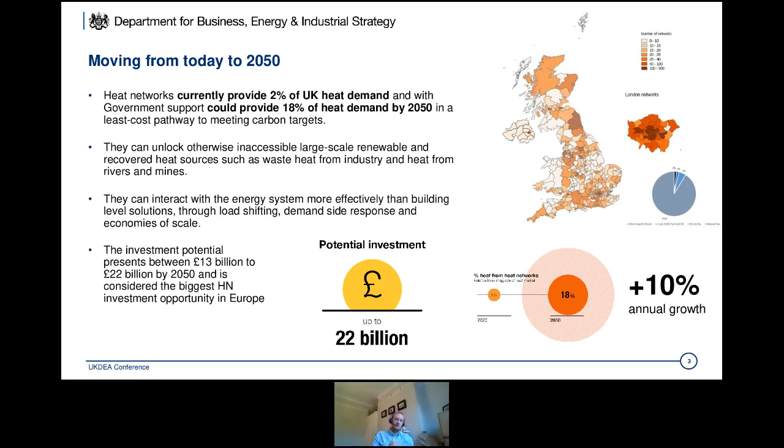But I was going to explore a little bit more about what happens next and think about what that looks like for the 2020s. So we've got something now that we're calling our Heat Networks Transformation Programme. And this is a number of projects that were at different stages of planning that we think, when brought together, give us a really compelling case for continuing that accelerated growth of heat networks in the UK to 2025. So just to unpackage that a little bit.

We've got actually the final year of the Heat Network Investment Project, where we want to finish supporting all of the fantastic projects that we see in the pipeline. We've then got our Green Heat Network Fund, which was announced at the March budget, which is our 270 million capital support scheme to aid the transition from fossil fuels to low and zero carbon heat networks and start to make an even more meaningful contribution to 2050.

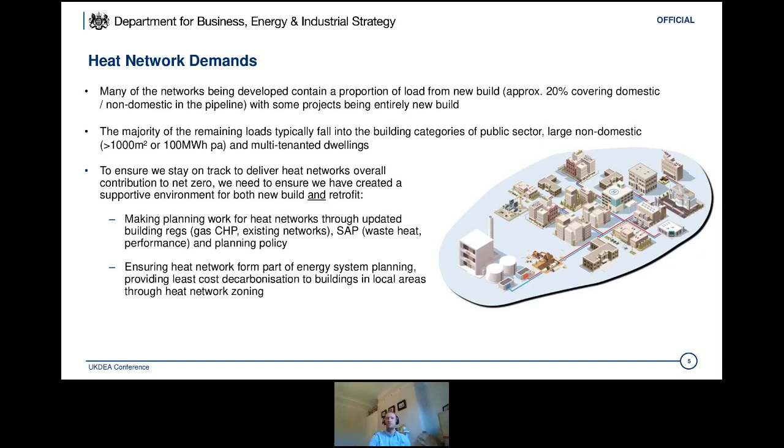Then on the retrofit, I mentioned the zoning already, and that's really more of an energy system planning role, whether that's national, regional, or into the local, and making sure that it all fits together and makes sense. I also just wanted to flag that we do recognise that sometimes it can be challenging having conversations with developers, especially if looking to trade off a lot of different demands, whether that's affordable housing or green space or amenities, wider climate change and energy efficiency requirements. And whilst we love heat networks, we don't think that heat networks are appropriate everywhere. And actually, we wanted to try and build a common language between governments, between local authorities, developers, and others, to try and work out at an early stage whether having the argument about the heat network was the right thing to do for that particular development.

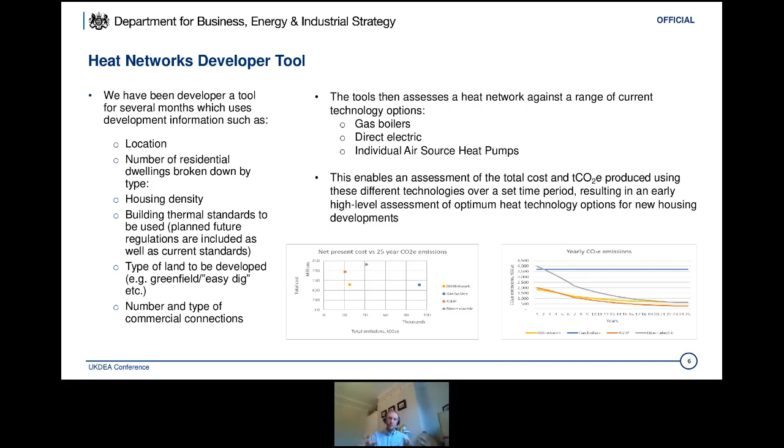So we've been progressing the development of an early screening tool for a little while now. Again, working with developers and other people in the market. I won't say too much about this. I suspect that I should probably send something around afterwards just to outline what it is and what it does. But essentially, it looks to compare the upfront costs of a building level solution to a network solution and consider how those costs impact the different parties. So the developer and the customer, and make sure that things are clearly articulated and communicated to all those parties, so people know what they're signing up to.

And then finally, given the fact that I'd stepped through what I see as our package of support in the 2020s, I'd also just say, well, actually, what might it look like in 2030? So, for me, there's been a shift to low carbon heat sources, and there's a clear trajectory for all heat networks to net zero. We have seen year-on-year growth. We've talked about 10% growth rate, and we'll see significant investment in the sector. And those networks are going to be larger, more strategic. I think all areas across England and Wales and Scotland where heat networks are most cost effective will have been established and clearly communicated, and they'll have started to be built out.

That there are a variety of investors coming in because of this changing risk profile and the size of the prize. That our supply chain has matured and our ability to commission projects has matured. So we've got lots of different new people in the market. That actually some of those wider benefits of the energy system that I talked about are recognised and hopefully monetised, so that if your heat network's offering a system benefit, you're getting paid for it. That all domestic customers are adequately protected, and those that aren't included in protections actually think they're getting a good deal with the quality of heat that they're receiving. And that we've got a set of common standards across all networks, so that if we do have individual networks still coming forward, they can connect and grow over time.

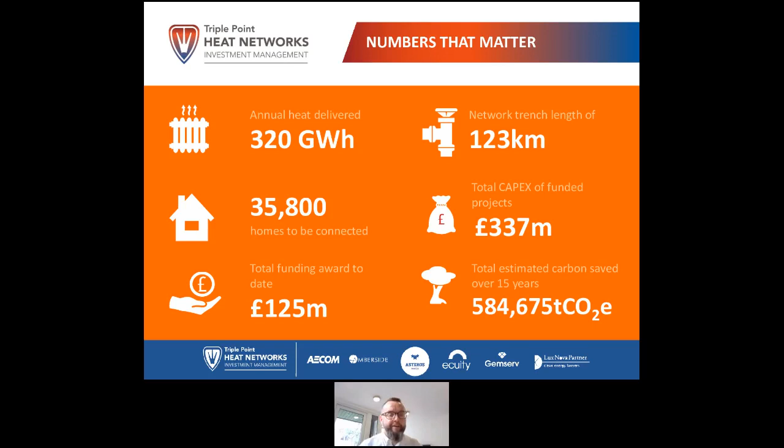when these projects get built out, our investee projects now, to whom we've made the £125 million worth of awards, that will have unlocked an aggregate capex of £337 million that will contribute to delivering 320 gigawatt hours of heat per annum to a little over 35,000 homes, as well as a number of businesses and public sector buildings. It will do so along an aggregate trench length now of 123 kilometres, and it will deliver, frankly, a pretty whopping close to 600,000 tonnes of CO2 over the first 15 years of operation of those projects.

Now, if they're the numbers that matter, I think given the state we find ourselves in, a COVID-ravaged country, these are probably the numbers that really matter. The Local Government Association and the Institute for Public Policy Research estimate that as many as 700,000 jobs could be created in the transition to a green economy. Better than that, they say that as many as 80,000 could be created in the district heating market alone. And we're seeing evidence of that now.

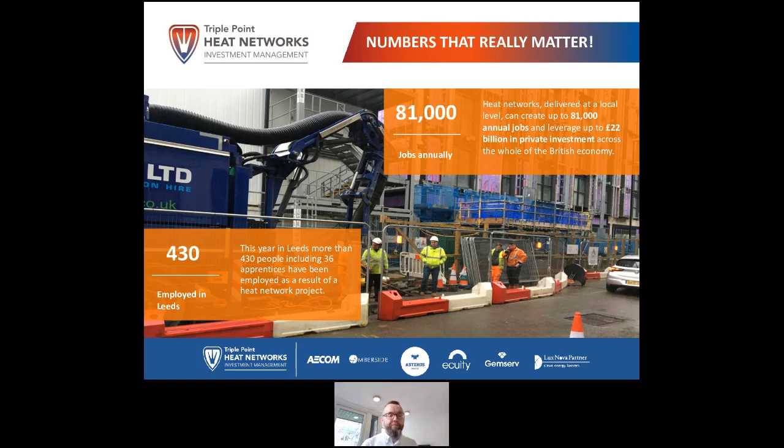Vital announced just last week that they're building a training and skills academy up in Blackburn. And we were thrilled when Leeds City Council, one of our first round success stories, told us that our funding had been an enabler of 430 new jobs already in the city, including 36 apprenticeships. All really brilliant stuff. And if driving local and national economic growth are a priority for the scheme, it's also true that it's vitally important that we inject capital and liquidity into the supply chain, the domestic supply chain in particular, firms like very many of you here today.

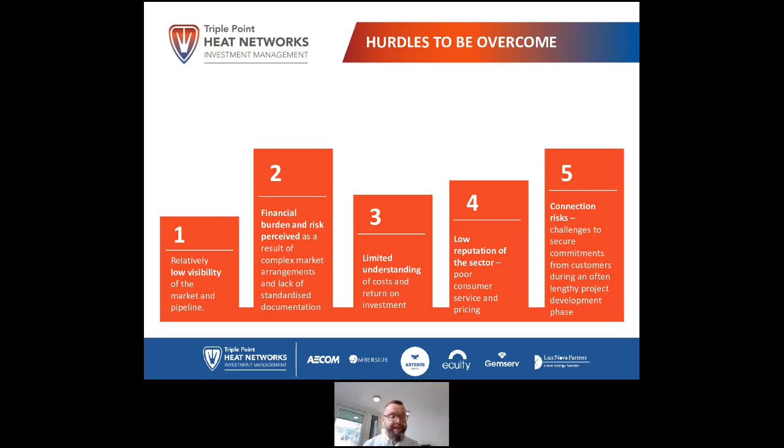Triple Point have already got a pipeline of something like 200 projects across the public and private sectors, and we've got the likely appointment of an experienced regulator that John described on a really near time horizon now. The sector is also being professionalised as well. Our colleagues in the delivery partner group, the legal firm Lux Nova, have produced some templated sales, operations and maintenance contracts available to anyone developing a district heating scheme. We've already seen evidence of their use in the market, which is awesome. Their use means saving projects valuable time and, of course, lots of money on legal fees as well.

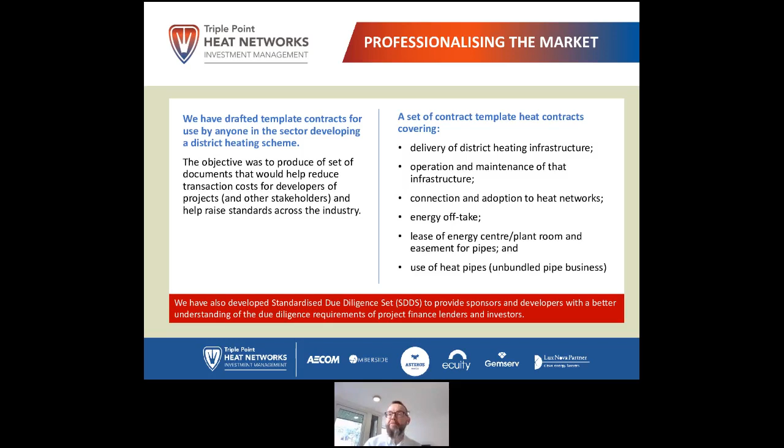More than that, though, their widespread use is a driver of the kind of standardization that is so attractive to investors. Within the delivery partner group, we've also developed a standardized due diligence set. That's a set that provides sponsors and developers with a better understanding of the due diligence requirements of investors and lenders alike. All positive stuff, I hope you agree, that's brought us to the point where we feel able, finally, to launch a funding framework with high levels of confidence in its likely success.

We have now created and launched a new heat network funding framework. It's an OJEU procured dynamic purchasing system that will attract, we hope, funders and investors with requisite levels of experience and appetite to bring heat network projects to fruition. It will have a broad range of funding available. There will be a senior debt lot, an equity lot, there will be an asset finance lot, and funders will be expected to demonstrate an ability to deliver services alongside that funding as well. And it's going to be available to all public sector sponsors and owners of heat networks.

We think this is key to fulfilling that brief of the self-sustaining market. It provides a really efficient and proven way for the public sector to access private capital in a way that provides certainty of procurement. Certainty of procurement is super important to local authorities, also to investors in particular. It allows public sector bodies to engage funders to help structure and financially close projects as well. And as I said, the exciting news is that this is out now, today for the first time in OJEU. We've called it BHIVE. We love an acronym. It's the BEIS Heat Investment Vehicle. Out in OJEU today, it appeared on ProContract just a couple of days ago.

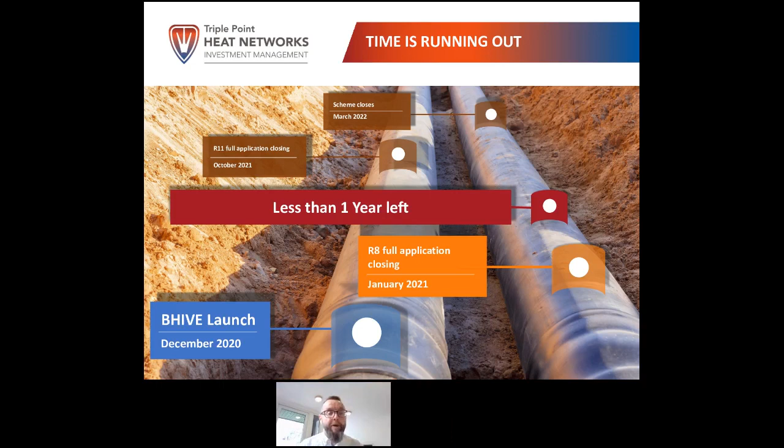application for round 8. From that point onwards, there's less than a year to go, at least until the final closing round for applications. Round 11, the last round, closes full applications in October 21, that ahead of a full scheme closure in March 2022, with no prospect of an extension, I'm afraid.

Simon's joined me, so I reckon I've got a lot to say. I did promise you just 10 minutes. Sorry, Simon. Last slide then.

If there are short-term challenges, there are definitively long-term wins. We are going to get this money spent, every penny of it, and draw in more from BHIVE alongside it. There's going to be an awful lot of learnings as we grow our experience bank. We are going to deliver on those carbon savings. And really excitingly, we have seen and continue to see a real ignition of political interest in heat networks.

Now, our Minister of State, Kwasi Kwarteng, has been tweeting for England about all the good works. BEIS, of course, Triple Point, of course, but all of you and Simon and the association, about all the work that we're doing in developing our heat networks at pace. It is possibly, probably true that in time, a lot of our decarbonised heat will be derived from other technologies. But the Minister seems to know now that which we already know, that heat networks are the bit of the jigsaw that we can be getting on with today and must be getting on with today.

And sorry, Simon, I'm all done. No worries, Ken. Thank you very much indeed. I'll give you a solo clap there, because apologies, we're all working virtually. But no, you did a brilliant job of talking us through heat networks and the support that Triple Point were offering to those. So I'll let you leave the stage and invite Catherine to come and join me, and Tom, if you don't mind putting Catherine's media up on the stage, then I will step off and let Catherine carry on with the presentation. So thanks very much indeed. Over to Catherine. Good morning, everyone.

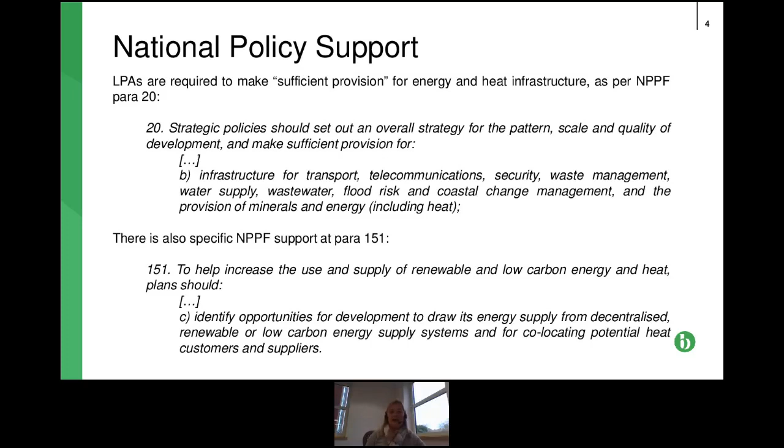So at a local level, many local authorities will have detailed policies which really attempt to introduce into their areas requirements for the delivery of district heat networks. Not all local authorities have done so. Sometimes there are numerous hurdles as to why this hasn't been done, but there are many who are proactive, and I'll just run through a few who really approach this challenge in various different ways. I know several of the later speakers are going to touch on a lot of these schemes in more detail, so I won't cover it in huge detail, but just to give you a bit of a flavour.

So in Stratford-on-Avon's core strategy, for instance, which is one of their development documents, they've designated specific district heating priority areas where new development is required to provide infrastructure for district heating. So if development comes forward in one of those priority areas, they are required to consider infrastructure for district heating. And then in Bristol, where I'm located, we've got heat priority areas within which developers are required to incorporate infrastructure for heat networks where it's technically and financially viable.

And I know we're going to have a bit more of a presentation on that from Paul later on. Another approach as well is some authorities have identified that schemes aren't really coming forward, so they've decided to take the initiative, and in Leeds, where there was insufficient private sector funding for these schemes, they really earmarked public buildings and social housing to be the first anchor load of connections in the development of a city's heat network, really to kickstart the heat network in that city.

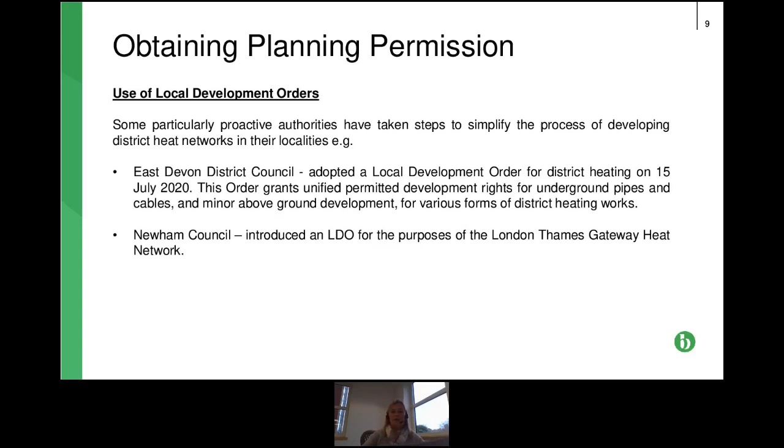Network. I think there is a section on local development orders later, so I won't touch on that in too much detail. I just wanted to mention this in passing.

The last topic I just wanted to mention is the building regulations position, which potentially could be a bit of an issue in the future. Building regulations is changing, and the standard assessment procedure that sets out the methodology for determining property ratings is changing. The process that's being introduced was supposed to come in late 2020. I think that's now going to be next year. But the whole aim of it really is to align with the upcoming changes to building regulations Part L, which sets out quite detailed energy efficiency requirements.

And the issue that we're starting to hear from our clients and within the industry is that the overarching objective of the current changes is to move towards the decarbonisation of the electricity grid. And the standard cogeneration approach to district heating would receive a carbon penalty under this new assessment regime. Unfortunately, the new regime doesn't treat site-generated electricity as favourably as it has been, which potentially could discourage the use of CHP and potentially undermine the operation of heat networks.

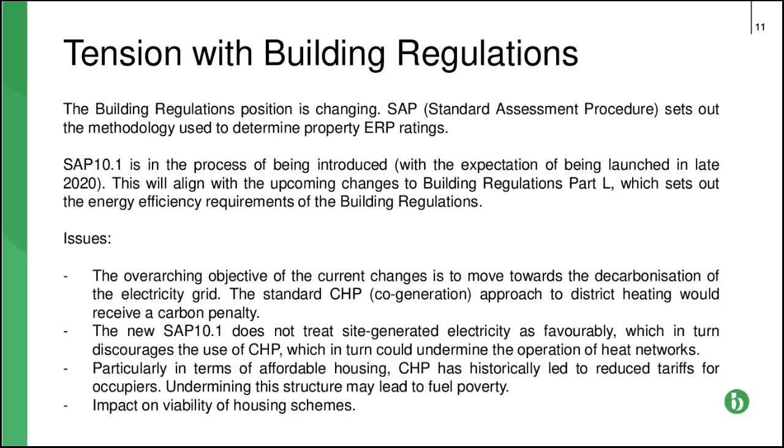We've certainly heard from some of our affordable housing clients that CHP has historically led to some reduced tariffs for occupiers, and they are concerned about the reduction in these benefits, which could lead to fuel poverty. And they're also concerned about the viability of housing schemes. There's concern that some developers could be penalised by being required to connect to these housing schemes. So viability is a bit of an issue. So I think that's something to be aware of.

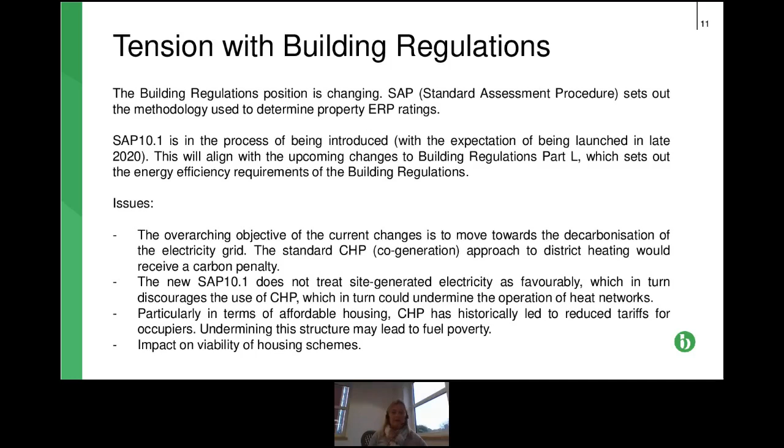So conclusions really: there is a national and local planning policy framework to assist in the delivery of heat networks and the heat infrastructure that's needed. As I've mentioned, many think there isn't really quite enough teeth in that framework to really require developers to deliver. Obviously, it's different if you're a local authority who's looking to deliver their own scheme. The localised adoption of policies that really implement what's required at national level is a little bit patchy. Many local authorities are very proactive, but other local authorities have significant hurdles to overcome, and so their policies are not always quite so helpful.

But I think there is a real problem between translating what is at national level into local level and how to really get it implemented. There are planning permission hurdles, and I think it would be really helpful if there were some permitted development rights for this type of infrastructure to make the process more streamlined. And lastly, as I've just mentioned, I think there is potentially a bit of an issue with the new building regulations that are coming forward. So I hope that was a helpful overview, really, of the planning policy framework and how that supports heat networks.

Brilliant. Thanks very much indeed, Catherine. That was really interesting. I was personally frantically scribbling down, although we'll all receive copies of your presentation, and I thought you raised some really interesting case studies as well that I hadn't personally come across.

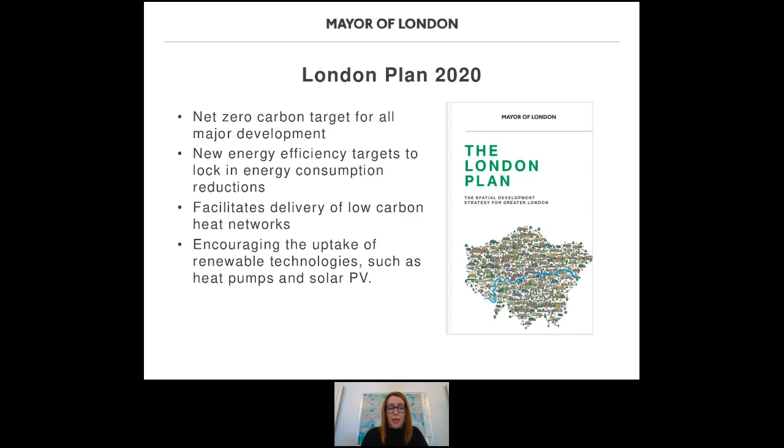They must be clean, supply energy efficiently. This is where district heating networks come in. And they must also be green, so use renewable energy before offsetting any carbon shortfall. And they do that by making a payment into the relevant borough's carbon offset fund.

Be lean is really the most important aspect of this, to reduce demand as far as possible in the first place, before considering the most appropriate heat source for the site. And the new energy efficiency targets that we've introduced are really intended to support that. And we're already starting to see planning applicants respond to those targets and achieve higher energy efficiency savings.

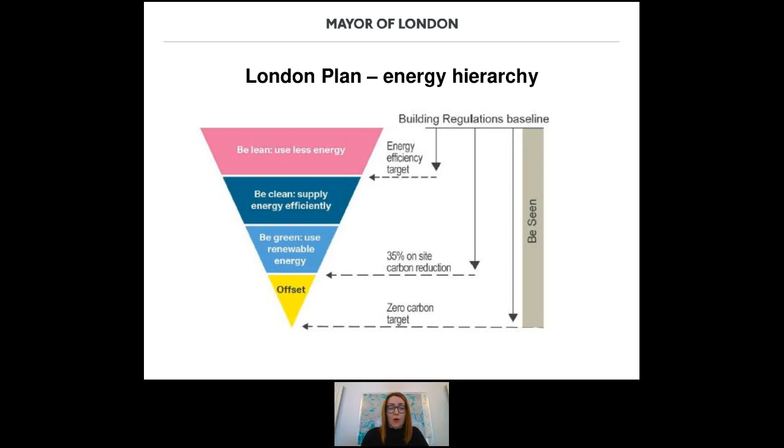Be clean is where the carbon savings from connecting to heat networks are captured, and to establish the carbon savings that are achieved at this stage and what heat source is selected, planning applicants should follow the heating hierarchy set out in the London Plan.

So major developments in heat network priority areas. These are areas in London where heat density is sufficient for heat networks to provide a competitive solution for supplying heat to buildings and consumers. So major developments should select a heat source in line with this hierarchy if they're in one of these areas.

So first of all, they're required to identify whether their site is in a heat network priority area and whether there is an existing or planned heat network in the vicinity that the development could connect to. So heat network connections for new developments really are prioritised, and we want to see they're fully investigated before moving further down the hierarchy.

And if a network is planned in the area but not already in existence, then the development must demonstrate it is designed to connect to that network when it comes forward later on. My colleague Simon, who's presenting later on, will be covering that in some more detail.

So if not, they then move down the hierarchy to point B, so using zero emission or local secondary heat sources in conjunction with a heat pump. And that really is to encourage use of secondary heat from environmental sources, whether that's air, water, ground, or waste sources, so heat from the tube, sewer systems, data centres.

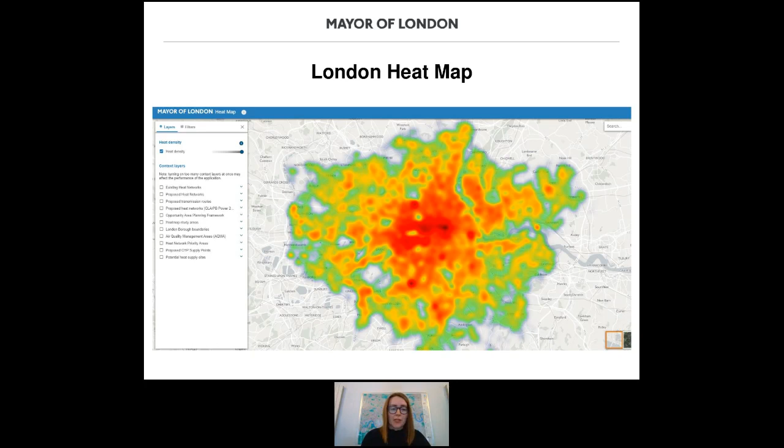And then finally, I wanted to outline the work we've been doing to support heat network decarbonisation plans. So since January 2019, we've been encouraging the use of updated SAP 10 emission factors in planning applications. This was in response to national building regulations using outdated carbon emission factors, which weren't reflective of the decarbonisation of the grid and therefore leading to higher carbon new development. So that wasn't a position we felt that we could justify. So we took the decision to take this approach until government updated building regulations with updated emission factors.

However, we are continuing to allow the older SAP 2012 emission factors at sites that have potential to connect to a district heating network, which are typically gas engine CHP, because of the benefits district heating networks can have in terms of establishing a flexible energy system for managing demand, making more effective and efficient use of energy at scale, as well as their ability to make use of secondary energy or waste heat sources, and for decarbonising supply to multiple consumers, in particular those in existing less efficient buildings, as lower carbon heat sources come onto a network over time.

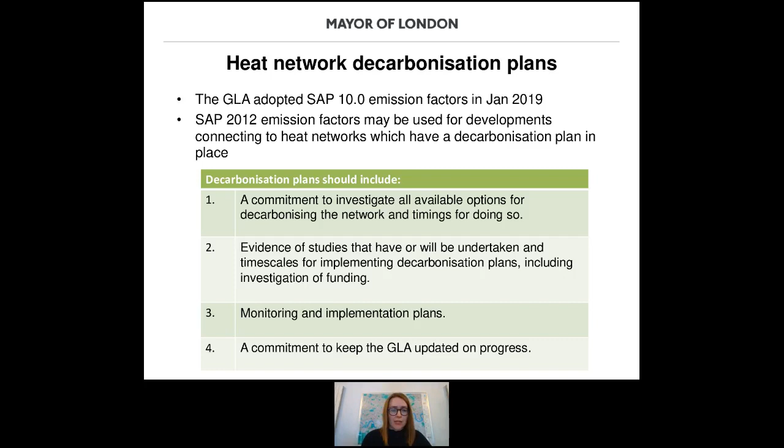Thanks very much, Anne-Marie. That was a really good run through of what's happening in London and sort of set the scene for seeing what's going on in other parts of the country. So thanks very much indeed. So Paul Barker, if you don't mind coming onto the stage, and Tom, excellent, already done. And I will rapidly hand over to Paul to talk us through what Bristol's approach is to ensuring new developments connect to heat network. Great, thanks, Simon.

So good morning, everybody. My name is Paul Barker. I'm the Energy Infrastructure Manager for Bristol City Council. So I am not a planner. I'm on the development side of the council, and we're actually developing our own heat networks. And so that's where I'm coming from in terms of the discussion. So basically going through a little bit of where we've got to ensuring new developments connect to our heat network.

Okay, so just a very quick one about what we're doing. So you always have to have a slide with a picture of a district heating pipe being installed within it, and that's just showing that we are actually installing heat network district heating pipe at the moment within the city. We've got plans for that to be a decarbonised heat network.

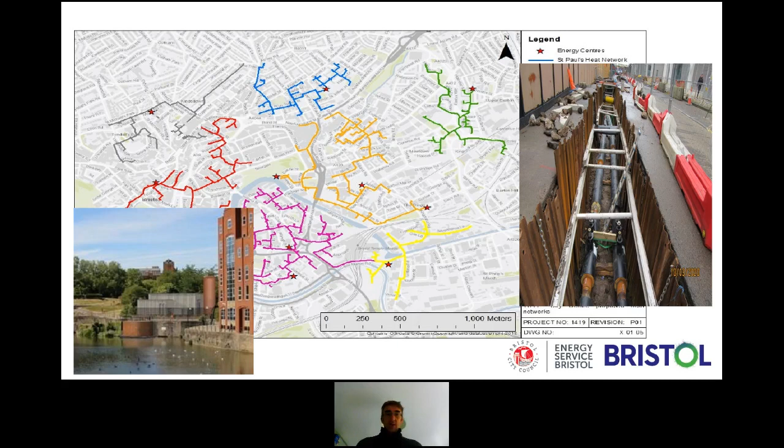So the picture in the bottom left-hand corner is we recently received planning permission for a water source heat pump energy centre. So we're installing a 3 megawatt water source heat pump that will utilise Bristol's floating harbour to provide zero carbon heat. And as you see from the slide, there's a number of heat networks that we're developing ultimately to connect into a citywide heat network.

So my brief was around discussing how we ensure new developments connect to the heat network, and essentially, as was previously picked up by Catherine, we have a planning policy. It dates back now. I can't believe it. I realise it's 2011, so it's nearly 10 years old. So it's actually getting a little bit long in the tooth. And certainly if we had the time again, we'd make some changes to it.

But essentially, there's 3 areas that it requires. So there's ensuring energy efficiency with new developments. The other element is that there's a 20% reduction in CO2 from on-site renewable energy. And the other element, the key element, is the heat hierarchy. So very similar to the GLA.

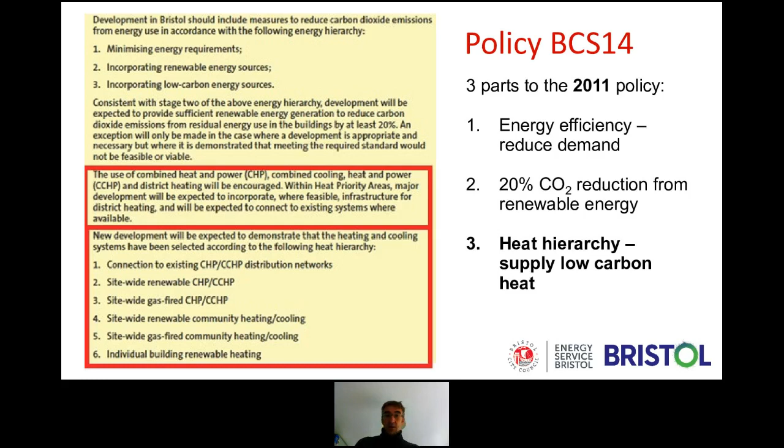We do get developers that do not want to connect to the heat network. They do find it a hassle, so they will try their darndest to get out of it. So certainly things that we would look to do if we had an opportunity to refresh our policies going forward.

I think as we move forward, we may look at reducing this and looking at heat network zones and possibly individual zero carbon heat solution zoning on buildings. So that's something we're looking at. But having it quite large enables the council to look at those new developments and decide, okay, this is not an area where we are developing a heat network. It could well be in the future. So we would expect at least a district heating ready solution.

But if it's an area that we think is low density housing, and it's unlikely that we will develop a heat network, then we'll allow them to move down the heat hierarchy and ideally provide a zero carbon heat solution on that development. And I think that's the great thing, albeit it does mean that there is a resource requirement for the council to have somebody or a team available to do that assessment.

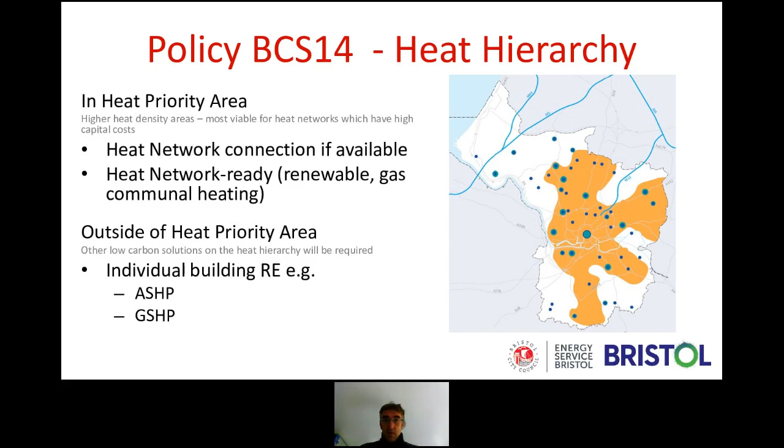So I'd said that we have had very good success with actually ensuring new developments connect to the heat network. I think there's some key reasons for that. So for each planning application that's submitted, they would have to provide a sustainable energy strategy. That is then reviewed not by the planners, but actually by a small team who is a part of our sustainable city team. So they review those strategies. So they have a certain level of expertise to review those and provide advice to the planners.

So it's not the planners having to be an energy expert. They've got somebody to lean on. And equally, because the heat network development team is within the city council as well, my team, we're able to both support the sustainable city team with their advice and also planners. So yesterday, for example, I was on a call with a developer who did not want to connect, to sort of push the rationale and to combat some of the regular questions we get about why we want them to connect to the heat network.

So I think the other big bit of success is the fact that we use Section 106 agreements to ensure heat network connections more so than planning conditions, and that's what I'm going to come on to now. So initially it was planning conditions that the planners would generally put on a development in terms of requirement to connect to the heat network. But actually, and interestingly, it was a developer who initially said, actually, I'd like it. Can we have it as part of a Section 106, please?

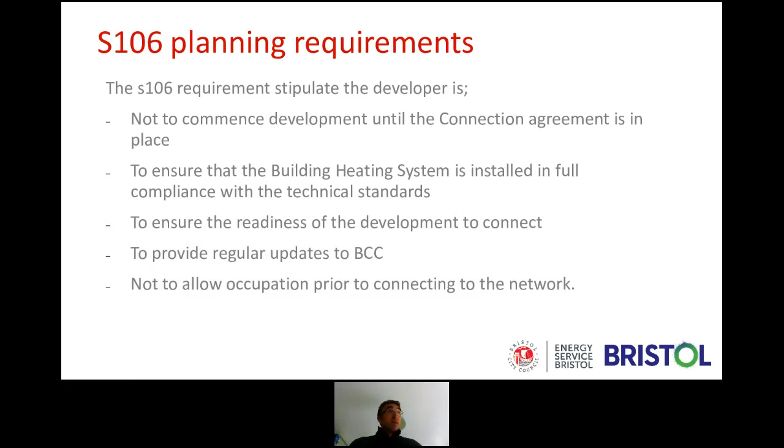So it allows us, within the Section 106, that at key points they would come to us and say, right, is your heat network going to meet our delivery timescales? And if we say yes, then they will start progressing a heat network connection. If we say no, it's not looking like our heat network will be in that area by your required date, then we would allow them to go back to a district heating ready solution.

And that's where we worked very closely with the developer and their M&E consultants to design a really good CIBSE code of practice building. And actually we moved that from a 2 megawatt connection down to about a 1.2 megawatt connection, just through the fact that they were over designing parts. So there are actually some savings to this for the developer.

Yes, we have seen some real success, and we continue to use the Section 106. And I think a key thing is we've worked very hard with our planning officers to get their buy-in, and we're seeing the fruits of that labour now, as they are very happy and confident to push back when developers say they don't want to connect to the heat network. So I think that was my last slide.

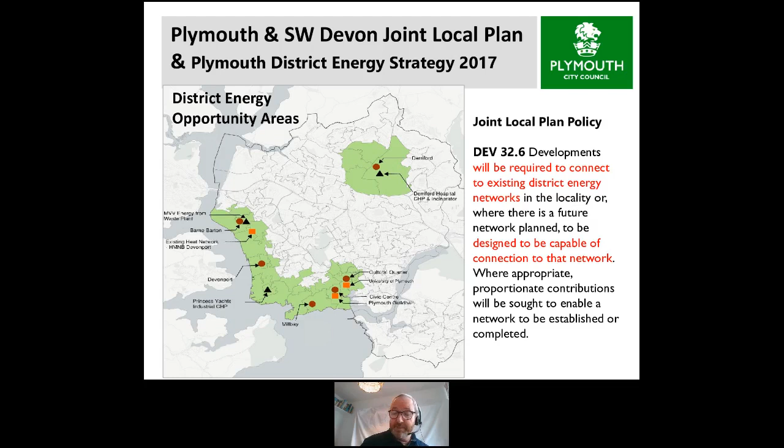And so evidence base is a key part of the planning, and we also have to justify. We had to do a viability appraisal to demonstrate that it wasn't too onerous on developers. So there's lots of challenges in producing these, but we're quite happy with the results, and it is working, and we are getting some success and traction now. But obviously, that's still quite high level.

So the supplementary planning document that underpins that provides a lot more detail. It doesn't set policy, but it gives a lot of guidance, particularly in terms of district energy. So as well as those district energy opportunity areas, it also gives some criteria-based characteristics where we'll expect developers to set out their approach to district energy.

As with planning, there's always two get-outs for developers which they can use, which is they can argue that it's not technically feasible. Obviously, we can challenge that, and also it's not financially viable to connect. So there are always in planning, wherever you are, those two get-outs.

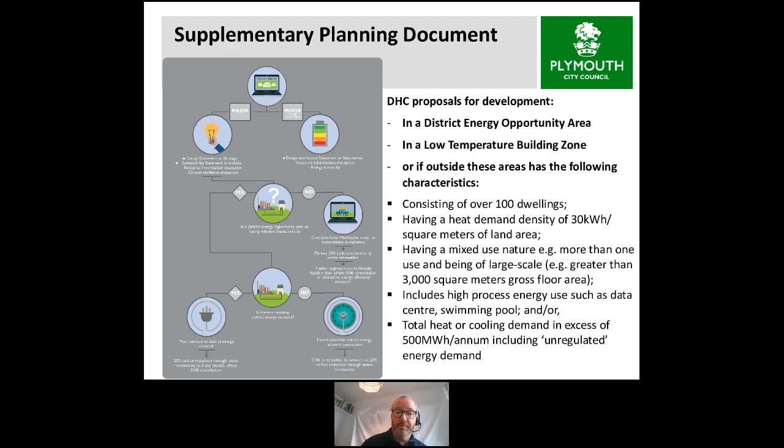But one of the things we've found in the past, in terms of comments, is that planning can play a key role in helping to create the market certainty locally by having strong planning policies in place. I've heard that time and time again, and I think that's really key here, particularly with different timescales of different developments coming forward. It can create that local policy certainty for the market to develop. But the supplementary planning document also covers a lot of detail about CIBSE standards and what our expectations are in terms of connection.

Planning is not the only show in town, and as has been mentioned before, future building regs are also going to create challenges to existing networks and create opportunities for new networks in terms of decarbonisation. So existing heat networks reliant on gas CHP will struggle to connect new developments to achieve policy compliance with building regs. Building regs, we've always wrestled with in terms of the relationship with planning. Building regs deals with individual buildings. It doesn't deal with collective building solutions, although it does give credits for connections to district energy. But it's something we do have to grapple with.

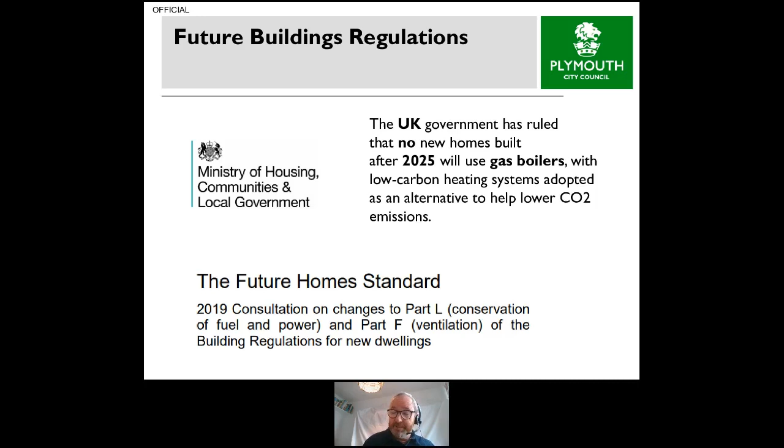And with SAP 10 coming in, again, I echo Paul Barker's comment. We've seen challenges with electric heating. We have fortunately put in our supplementary planning documents that we will not accept direct resistive heating. And that's for similar reasons. It's going to scupper our decarbonisation plans through electrification of heat and transportation. And we're working closely with Western Power to explore the impacts of heat pumps at scale.

So moving to lower carbon solutions means that we do have to look at different approaches to heat networks, but also local opportunities, which will vary from city to city, as well as waste heat. Where are the renewable sources of heat going to come from? We're quite fortunate in Plymouth. We're surrounded by the sea. Again, I'm amazed that marine heat pumps, we've been looking at various European projects previously, talking to lots of coastal towns and cities, and marine heat pumps aren't really on the radar sufficiently, I don't think. I think they've got huge potential.

But we're surrounded by the sea. There's also looking at the geology, sources of waste heat, and also air source. Particularly in the southwest, we have a very mild climate. Air source can work even better perhaps than some other parts of the country.

And in terms of whether you're looking at fourth or fifth generation district energy, we've done a lot of work through our HeatNet project, European projects, as well as the excellent Celsius project, where really the distinction between fourth and fifth is reducing the operating temperatures of systems to use more waste or renewable energy. Fifth generation is really providing heating and cooling, a different system architecture. And I think from our evaluations of fifth generation, you need a sufficient cooling load, which we do have in our city centre, of 40% or more to make fifth generation work in a technical sense.

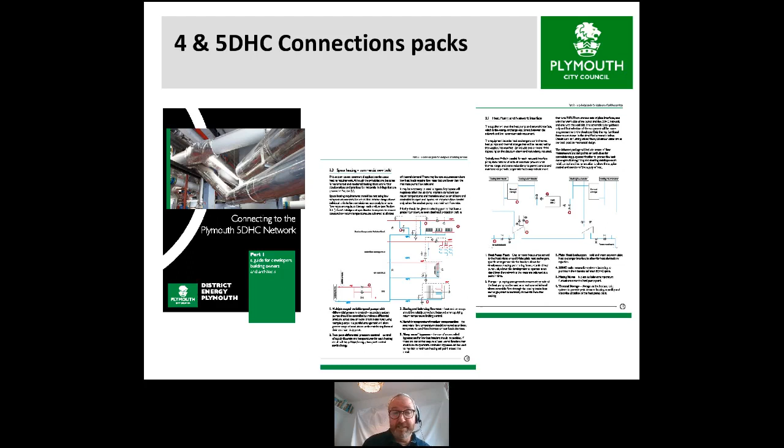Fifth generation, as I say, we're looking at it in the city centre. It does have benefits. The fact that the weather patterns are changing, we're getting more heat waves, cooling demand will be increasing, possibly heating demand reducing. So it does give some flexibility, but also lots of other benefits in terms of air quality, etc.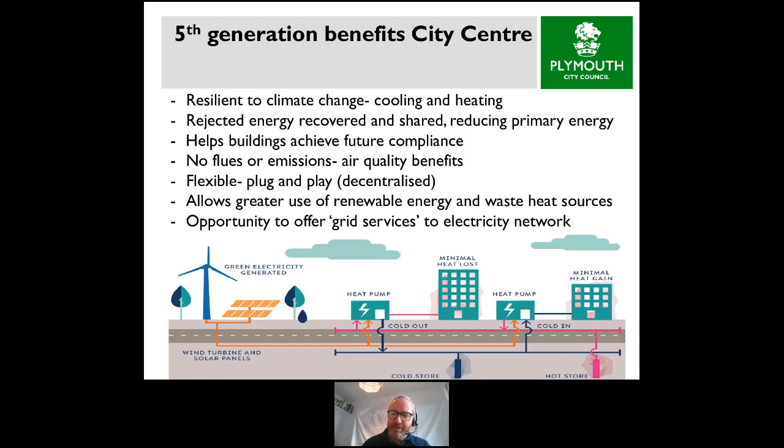One of the challenges for us in negotiating solutions with fifth generation is the fact that it's decentralized solutions on a building by building basis. The equipment, the substations are on a building level as opposed to larger centralized equipment. And you need to think about the electricity supply in that context. So there are some challenges there, as well as opportunities.

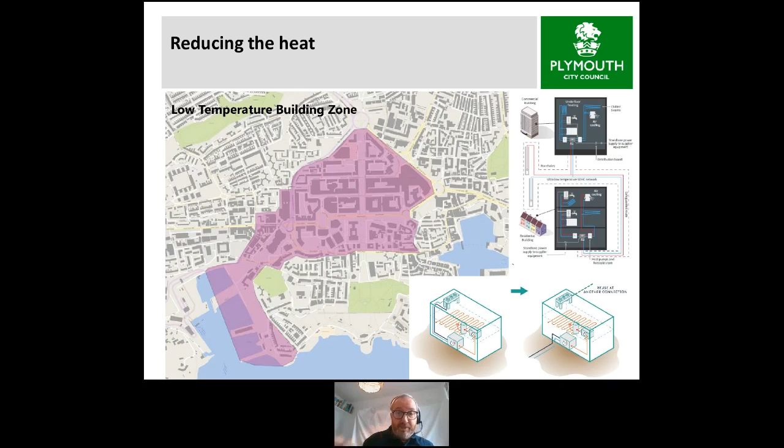And to try to facilitate that approach, we talked about zoning, some questions about zoning as well. In our supplementary planning document, we do show a low temperature building zone to try to drive down those operating temperatures to 60 degrees or below for low temperature in buildings, and ensure we've got the return temperature that's 20 or 30 degrees lower, to facilitate those sorts of solutions. And there's some extracts from our technical packs on the right hand side of the slide.

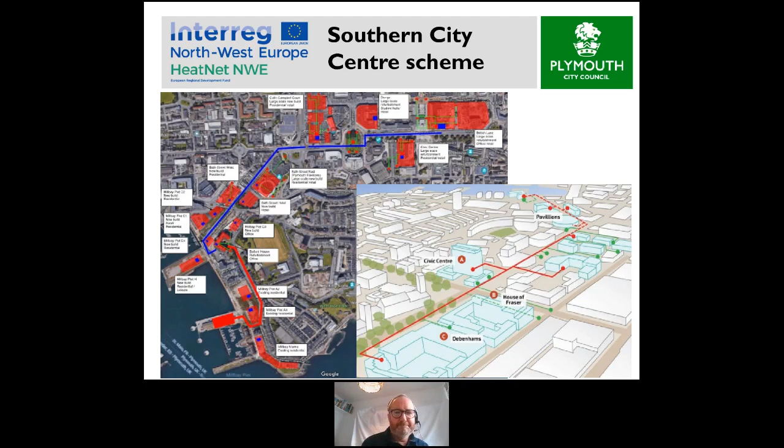And this is the last slide, you'll be pleased to hear, which sets out one of our networks that we're looking at, and in development. We put some infrastructure in already, in Millbay and Southern City Centre. As you can see, we're keen to get to the harbour side and deploy seawater, as well as exploring ground source solutions with an underground aquifer under this part of Plymouth. So I think that's all from me. I'll hand back to Simon.

Brilliant. Thank you, John. If you don't mind staying on the stage, and if I could invite Anne-Marie and Paul to come back and join me, please. That would be very helpful. Brilliant. So I've got loads of questions, but I'm most conscious of time.

But I think there's a really interesting question from Jodie, which you can all read. I think it's about you are all doing some really exciting things with heat networks, creating heat network zones, using essentially the planning system. So it's about the future of heat network zoning, and whether it could create a separate carbon trajectory for the zone, removing specific building regs targets for new builds in that zone, and how you see heat network zones working in the future.

Clearly, BEIS are consulting at the moment. So it'd be really interesting to hear what your thoughts are on what they should be doing, for want of a better question. Who wants to go first? John? Oh, Paul put up his hand first. Go for it, Paul.

Yeah, so I think heat network zoning covering both new and existing buildings is an absolutely critical thing that has to happen. What we don't want is for heat networks to be developed just supplying new buildings and missing out the existing buildings on the same route. We're future-proofing our networks, so when those existing buildings connect, whether that's through requirements or mandated or incentivized, that heat network has the ability to supply all that.

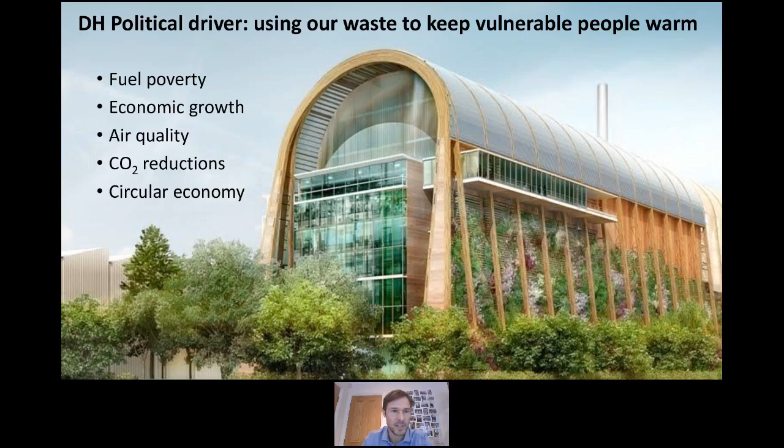As well as that political story, you can see that district heating had a really big part to play in terms of supporting economic growth, tackling air quality in certain areas of the city, promoting a circular economy, and more recently, having a very key role to play in terms of CO2 reductions. Now that really is our key focus. There's a clear recognition in Leeds that we have to play our part in terms of the climate emergency. So we now have a strong commitment to being net zero by 2030, and decarbonising heat is one of the biggest challenges to achieving that, with district heating being a great opportunity in dense urban areas.

But looking at planning, when we started doing our master planning for district heating in the city, we identified quickly that the potential was really extensive, that looking at just a couple of the key developments that were forecast at the time, 2 energy from waste plants to the east of the city, around the city perimeter, we'd identified that there was a huge opportunity to develop a large district heating network.

But if we were going to grasp that opportunity, we needed to create a stick to encourage developers to connect, and a carrot in terms of helping district heating companies to deliver district heating within the city. So we worked on some more detailed heat mapping, identified our opportunity areas, and then developed a hierarchical district heating policy, which is similar to some of the things you've heard from John and Paul,

where at the top of the hierarchy, you connect to the network. At the very bottom, you make sure your development's at least district heating enabled. And that's been working well with particularly more forward-thinking developers over the last few years.

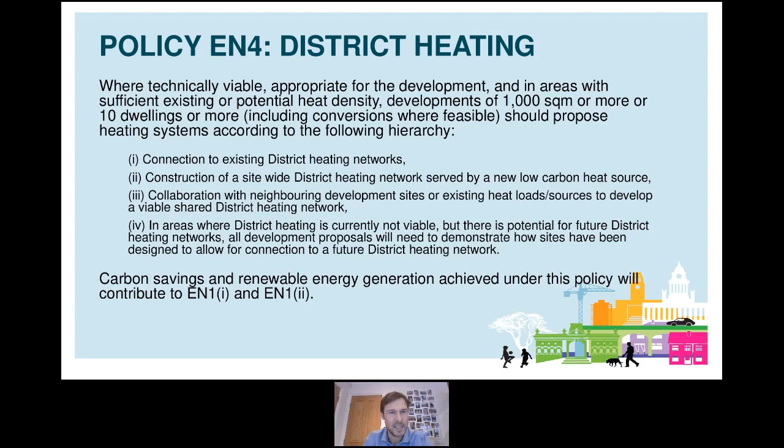But one of the things that we also identified was that district heating was a bit of an anachronism in terms of utility providers. So we looked at an LDO in order to solve a particular problem. So an LDO is simply a supplementary planning document, it's a local development order, and it grants planning permission for a specific activity subject to conditions. They're completely optional for councils to develop, and following consultation, they need Secretary of State approval.

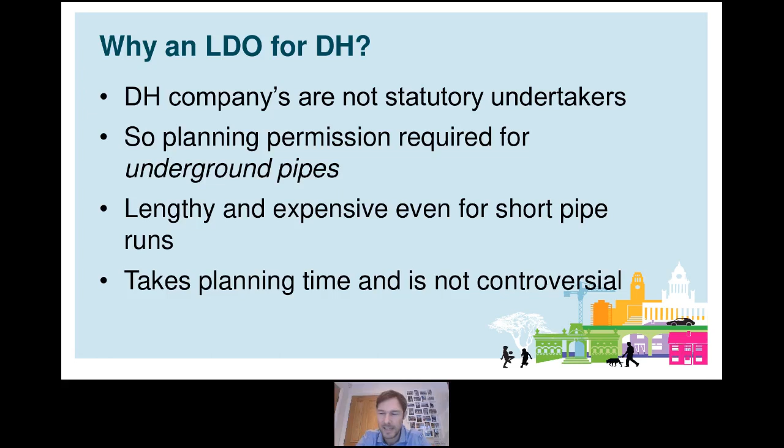So we'd identified that district heating was a bit of an oddity. District heating companies and local authorities are not statutory undertakers. So unlike gas and electricity and fibre companies, we need to apply for planning permission for underground pipes. And even for fairly short pipe runs, it's quite a lengthy and expensive process. And it takes up planning time, and it's just not particularly controversial. So we thought an LDO was a good opportunity to solve this particular problem related to district heating.

So we worked on drafting an LDO, which essentially provides planning permission for a range of the smaller measures that you need to develop a district heating network. It doesn't provide planning permission for energy centres; they still need planning, and some of the larger above ground structures still need planning permission. But for the district heating network and all of the associated fibre and the like under the ground, that all has planning permission provided as long as the conditions are met.

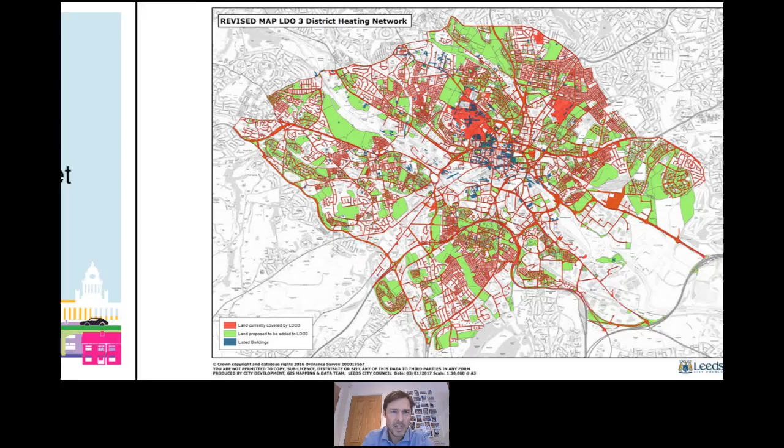So in order to develop an LDO, just reflect on the process quickly. For planning, it's an incredibly quick and easy thing to do, which in everyone else's eyes is quite a lengthy process. It took us between 4 and 6 months to go from developing the idea of an LDO for district heating to having something approved by the Secretary of State. The process that we followed essentially was demonstrating a need that we then took to our planning board, which provided the justification for developing an LDO.

We then did a large piece of mapping work to identify the specific parcels of land that we wanted to include within the LDO. So we mapped all of our own land, green spaces, the adopted highways, brownfield sites. We worked quite hard with some of the larger landowners in the city and some of our partners, so universities, hospitals, some trusts that own land, to get permission to include their land as well.

Produced the map that we've got on screen here, drafted up the terms of the LDO, the 9 specific conditions that would need to be met by anybody who wanted to use the LDO instead of planning, and then took it out to consultation. Consultation involved putting lamppost notices every 500 meters or so throughout the area covered by the LDO. So a couple of hundred notices need to be scattered around the area, and then writing to the statutory consultees. We had around 15 to 20 responses, broadly supportive.

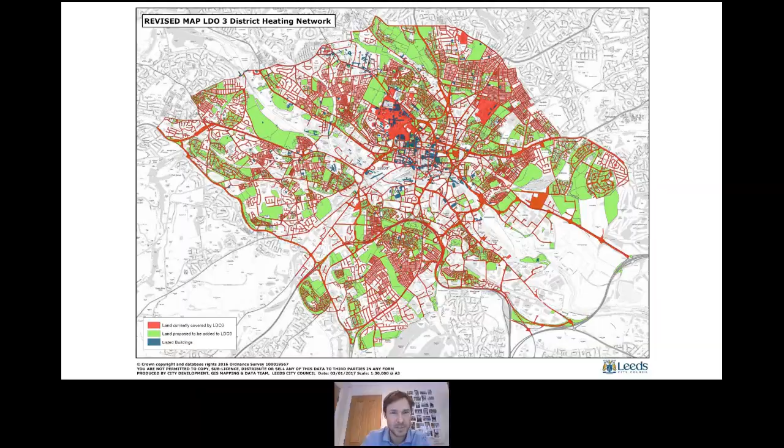So in terms of what that allowed us to achieve, it was a small part of the jigsaw that helped us to put around about £45 million into the Leeds Pipes network. It's been on the ground since late 2017. We've just completed construction of our phase 2 extension and have some HNIP support for a further extension to the South Bank. It's already around about 16 kilometres long.

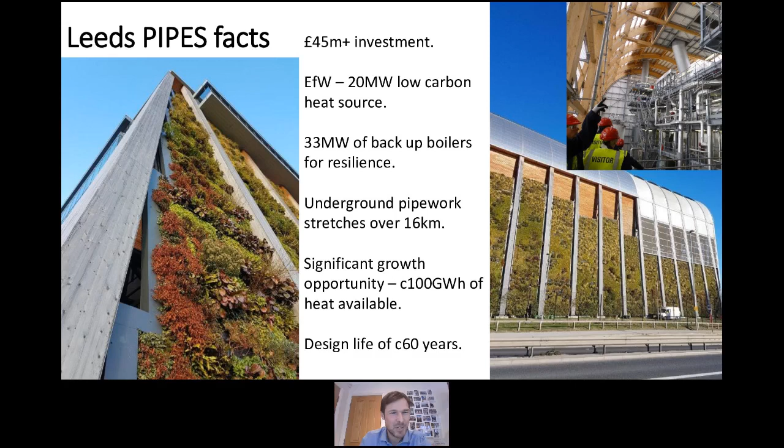It's got 33 megawatts of backup boilers and at least 100 gigawatt hours of heat available from our energy from waste plant. These pictures are of the built energy from waste plant, which I'm glad to say pretty much reflect the artist's impression of what it should look like. And then this is how it appears on the ground.

And the LDO just provided the planning permission for everything, all the pipes in the ground here. We had to apply for specific planning permission for the 2 energy centres and a couple of above ground sections of pipe. But other than that, it's simply a case of discharging the conditions of the LDO, which is far quicker, far cheaper all round than putting through formal planning applications.

And then just reflecting on some of the lessons learned, it's fair to say that it was relatively resource intensive to establish the LDO, but it has been incredibly useful, both at a practical level for us to develop and deliver our own network, and as a statement that Leeds is an area that is open for district heating. So we're now engaging with some other potential district heating suppliers who are keen to work in Leeds, and it is one of the factors that's helped them to become attracted to Leeds as an area to invest in.

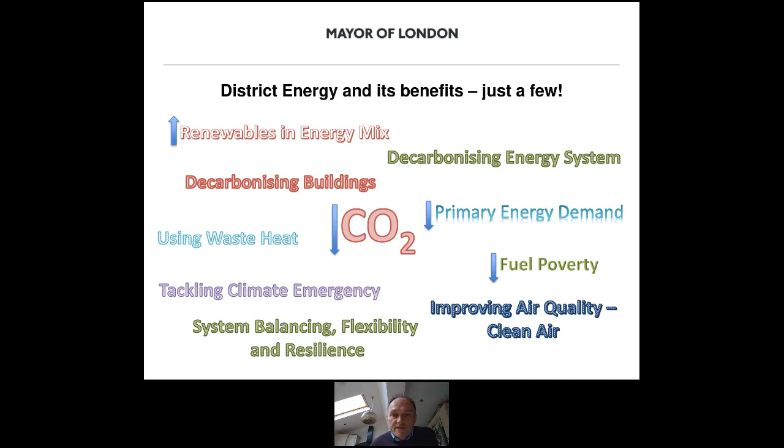As we mentioned, networks need to be an integral part of that energy system. Anne-Marie mentioned our 1.5 action plan, with four scenarios all getting us to zero carbon. In all of those, heat networks have a really important part to play. Using that tool, we reckon somewhere between 15 and 20% of London's heat demand might be able to be met by district energy over the long term.

And just to reiterate, let's think about networks as part of that energy system and not just about supplying heat to buildings. We've heard it all the way through the talks: where they offer greater opportunities to the energy system, how might we have a market structure that recompenses them financially and encourages networks to support the system and be rewarded for it.

And we've also talked a lot about this as well. It's really important that as we're decarbonising buildings and districts, we think about existing buildings as well as new development. I know we're talking quite a lot about new development here today, but for heat networks to play the role they need to, we need to be connecting a lot of existing buildings, because that's where the majority of buildings are and the majority of emissions come from. So it is about how we ensure connection of existing buildings as well as new development.

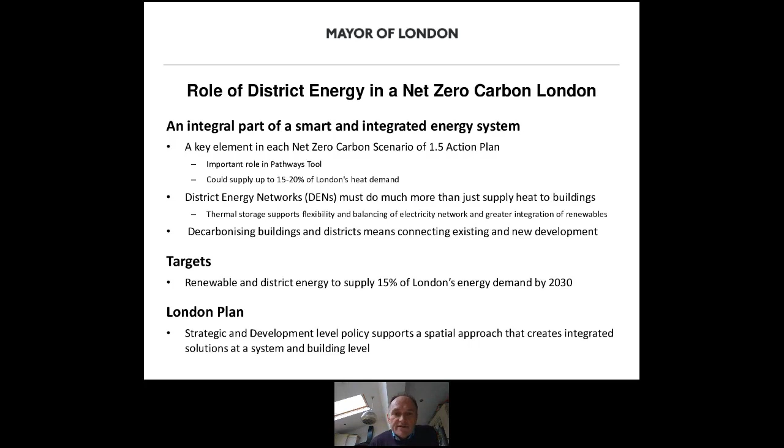Anne-Marie mentioned our 15% target for renewable and district energy to meet London's energy demand. So that's one of the drivers we've got for supporting district energy. And then the London Plan element, we'll be picking up on that a little bit more. We pick that up at both a strategic and a development level, and what we're hoping to do there is ensure policy supports a spatial approach to energy and creates integrated solutions.

So just quickly about the strategic spatial level. Lots of other people have talked about the role of understanding where your heat demand is, where your opportunities for heat networks are, and then thinking about how you're going to realise those. It's really important. We've already mentioned zoning, and we need to have done this kind of work to understand where those opportunities for zones are, which will then enable us to provide the evidence base for designating zones.

So we've mentioned energy master planning and heat mapping, and the London heat map allows us to identify where those potential opportunities are. This is a very active tool that guides opportunities and requirements around planning, but also around our wider decarbonisation work.

As part of that tool, we're also identifying renewable and waste heat sources, because as we said, heat networks are an integral part of getting to zero carbon. We need to be thinking about how we decarbonise our existing networks and create low carbon new networks, so it's really important that we understand where our potential low carbon heat sources are as we start thinking about network development.

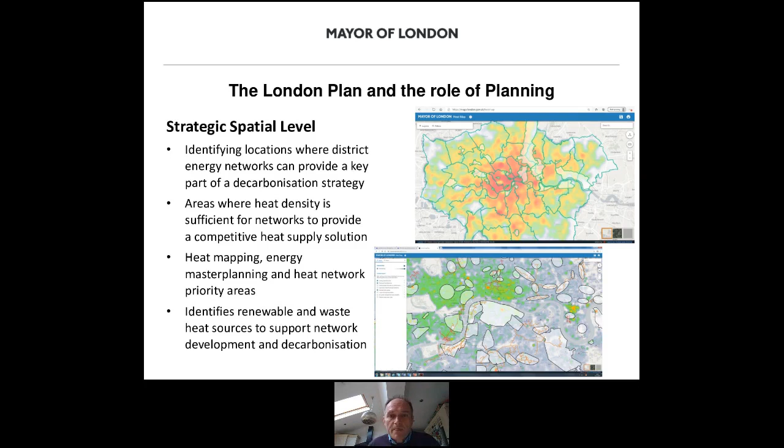Thinking a little bit about development level, we've mentioned the energy hierarchy, heating hierarchy, and our London Plan that supports district energy as an important solution for meeting the energy requirements of developments. We prioritise connection to existing or planned networks, in a similar way to other cities that have already presented.

So what we'll be looking for from developments when they're coming forward as part of that planning application is a demonstration that they've engaged actively with the local network and prioritised connection. A commitment to a communal heat network, which basically allows that connection to happen. Things like minimizing the number of energy centers to create that communal system, and providing a single point of connection for the network.

We've also picked up on other things during the course of the conference so far. Really important from a consumer perspective, for consumer confidence, is to have a high quality commitment to customer protection and standards of service, utilizing things like Heat Trust. As regulation comes through, that will ensure that communities are protected and provided with good quality service.

Also high design standards, which have been mentioned before, but it's really important that we ensure there's high design standards to enable those developments to operate. We'll look at the code of practice. We've also got a heat network manual in London that we produced as well. And we see some of our network operators actually having their own design standards and specifications so that they're able to work with developers to spec that out.

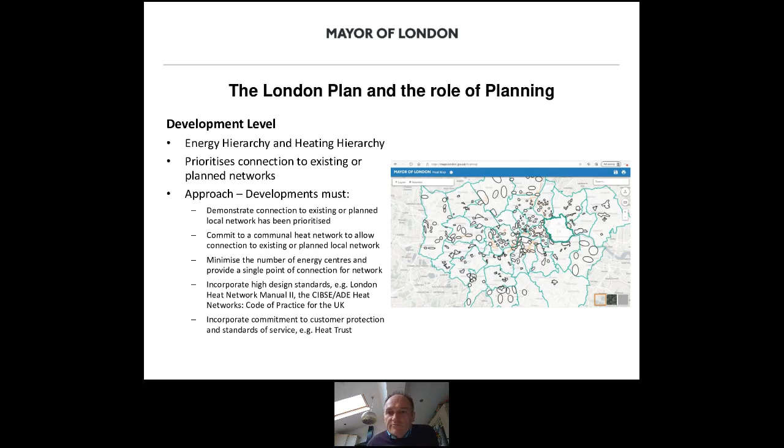This goes into a little bit more detail around the three areas. Anne-Marie earlier mentioned that we've got heat network priority areas, and we use those to highlight where we would look to establish networks, and we'd look for connections to those networks. In areas where we've got a network, as I mentioned, we expect developments to prioritize connection to that network. Where we've got established plans for a network and those are coming forward, again, we would expect a communal site-wide network with prioritized connection to that network.

Occasionally, we've heard from Paul and earlier that there's sometimes a slight time gap between when those developments require connection and when the network might come forward. So where there is a gap there, we expect developers and network operators to work together and agree an approach to ensure that heat is available as required, and if required, to have a temporary heat solution that enables that to happen, and then subsequent connection.

Some of the ways those agreements might happen: connection might be a number of years after occupation, once the heat demand of the development has grown to a sufficient level, or it might be a particular date when the network's expected to come past the development, or otherwise a number of buildings, where you see large scale developments with multiple phasing. Then also, we do have areas where there aren't well-established plans at the moment.

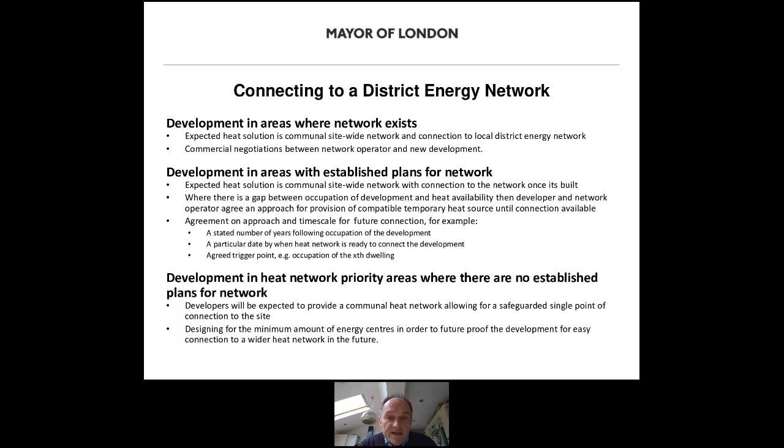Those are happening in certain areas, but not all the networks have got well-established plans currently. So in those areas where those are happening but aren't currently close to going into delivery, we'll again look for a communal network, basically with a safeguarded single point of connection, again enabling future-proofing that development for connection to that network as expected to arrive.

Then obviously we talked a lot about developers and what we expect of developers. Obviously the other side is actually what we expect of heat network operators. This is a really important two-way relationship, network operators with regulation coming forward and things. We've heard about it earlier, that they're incorporated within, treated a similar way as other utilities, so energy, electricity and gas.

So it's about having them being really proactive within areas where they've got networks, and engaging with those new developments and supporting them as they develop out. So again, that will be supporting with design and specification to optimize performance, expecting them to develop best practice design standards, spoken about it before, and that commitment to consumer protection.

So currently using things like Heat Trust, because that's really important about building confidence within the sector, and when we're thinking about things like zoning and expanding networks, having consumers aware of networks and aware that networks are a good solution for providing heat, that helps us to ensure that we'll be able to encourage connections in the future. Oh, and Anne-Marie spoke about it earlier, so I haven't mentioned, but really important for us is a decarbonisation roadmap for our network operators, because they're an integral part of us getting to net zero.

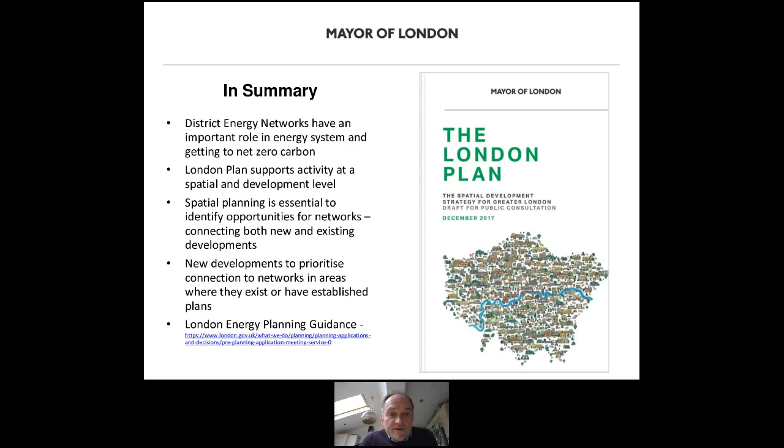Thanks, Owen. Simon, thanks very much indeed. If you don't mind just staying there for a second, Simon. George, would you mind rejoining us, please? Hi, George. Oh, lovely. Hi.

So, in terms of questions, I think I've got certainly one for Simon, but let's go ahead with the one from Sam in the questions for you, George. I don't know whether you've managed to pick it up. So, are LDOs helping in any way with highways approval for disruption or diversions? Yeah, so I think that's a step too far for LDOs, unfortunately.

I mean, the LDO is very specifically related to planning permission, and in terms of practical steps, the highways permissions, from my experience, are so closely tied into what else is happening around the city that they would never be able to do this through planning. They need to know precisely when you plan to be in any one street, how you'll manage the diversions and how you'll get out of that street. It's done through a different statutory route, so the section 171s or section 50s. So yeah, you still have to keep working with those highways authorities, Sam.

Okay, and just in terms of the LDO, because I've heard things for and against LDOs, George, that it will provide permission if you take a pipe down a particular route, but if you try to change that route in delivery, then it falls outside the LDO? No, so the LDO is different to planning permission. I think it's probably the other way around, where you'd get planning permission to go down a particular route and then would have to vary the planning permission if you then choose to go a different route.

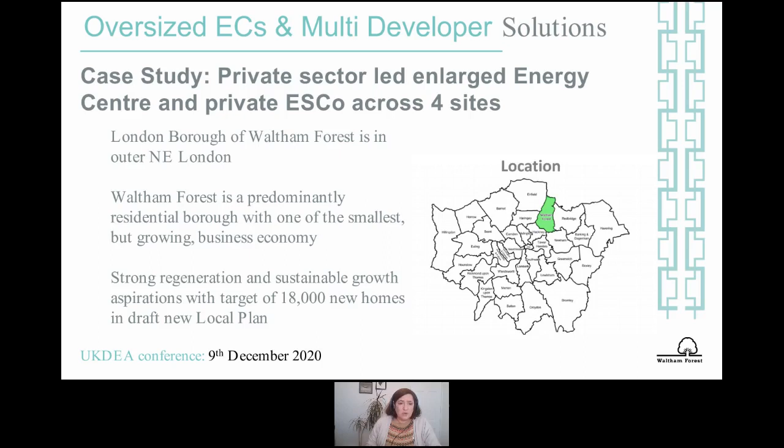We're a predominantly residential borough, but we do have a growing business economy, so a lot of our developments are predicated on residential redevelopment, and we have some very strong and tough targets moving forward where we want to focus on sustainable growth within the context of a climate emergency, which we have also declared, and we have a high target of 18,000 new homes in the draft new local plan. So a lot of work to do and working very much with the strong development community that we have.

So looking at this first development that we have been working on, you can see we started looking at this in 2011 and we identified 5 potential heat clusters. This was with GLA DEPDU, Decentralized Energy Program Delivery Unit support. And so we identified the 5 clusters here working through that study, and the one that we're going to focus on is Blackhorse Lane South, as it ended up being called. So the graphic that you've got there is looking at the final, very high level feasibility in terms of heat loads, etc., that the DEPDU support helped us with. And then we went through another series of iterations looking in more and more detail. So you can see we went through this in 2012, 2014 and 2015.

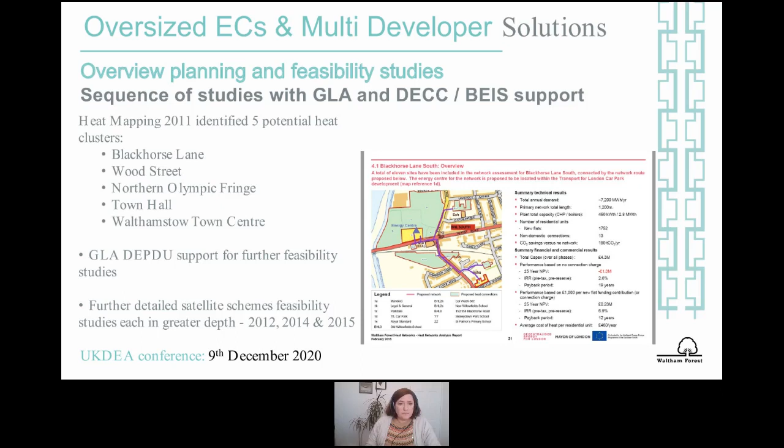Also to say that, as I'm sure most authorities do, we do have policies in our local plan, which was adopted in 2012. So it's called DM11, which is about connection to decentralized energy, and it's looking at that using the GLA heat network hierarchy. So moving into a little bit more detail, we also had an area action plan. So again, looking at what other tools we had within the planning framework. So this was adopted in 2015. And we had a specific policy within that, BHL 13, which was looking at decentralized energy, because we were conscious that there was the opportunity here with a cluster of sites that were next to each other, and we wanted to push as far as we could in helping facilitate that network.

So looking in more detail at the actual cluster of sites themselves, you can see there that we have got the site at the top, Taylor Wimpey were the main developers there, and they actually looked at offering an enlarged energy centre and were the first developer to actually come forward. And over the 4 or 5 sites you can see here, there's over 2,000 new homes planned, and most of the sites are actually on site construction at the moment, if anybody knows that area.

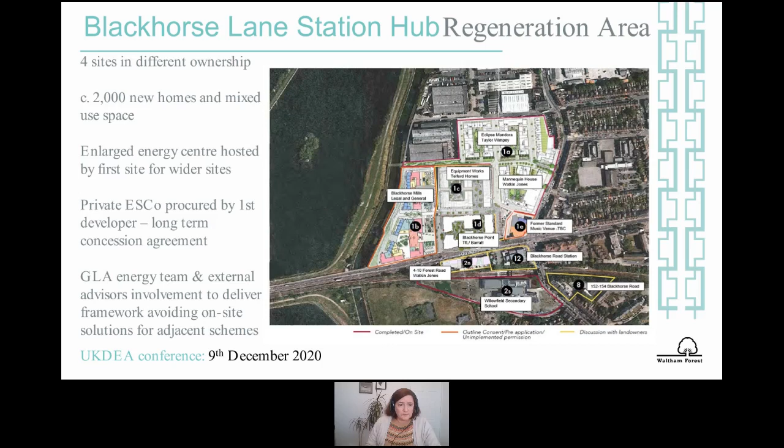So the Taylor Wimpey Energy Centre was hosted there, and what we were looking at, they had also procured a private energy supply company. And so what the GLA team and I did with external advisors was to actually work very hard with the developers to make sure across all the different sites that they were able and confident to connect. So joint partnership working was key to this.

So with the external advisor support, we actually developed what we called a term sheet to make sure with the ESCO that there was actually a fair offer being made to the other developers. Because remember that there are actually advantages for the developers in terms of not having to have their own plant space. And so what we were trying to do was help the developers through that process.

We also had very strong support from our planning development management function. So again, I was running workshops and bringing people up to speed in terms of how that work could be delivered through the planning system. And we had regular developer landowner meetings.

We were meeting quarterly. It was dealing with highway works and how everyone had to work together, because, as we all know, developers don't usually like being reliant on other people, but because these sites are so tight, that's what had to happen in this case. And it's been a very good process that the developers have all appreciated. And as I said, they're almost all on site now.

So what we've been doing is using the planning tools to be able to encourage the other developers to connect. So, like has been discussed before, we had Section 106 wording, and we actively were getting involved in stepping slightly beyond the planning process in terms of the hand-holding.

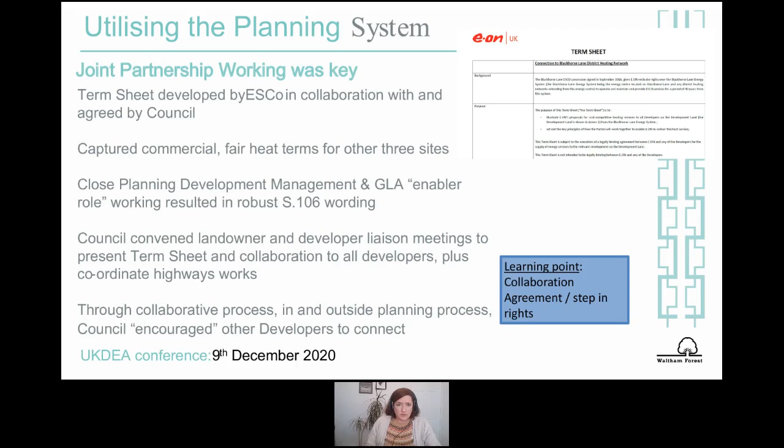And that picture there with people pointing at big CHP gas boilers, that is actually our lead member being shown around the energy centre when we launched that. This scheme, we've also accessed the pilot phase of the HNIP grant. So we were successful in being awarded £1 million to actually extend this network.

So it is connected to another council estate that is nearby. And we're using the existing plant room that was on that second estate as backup gas support for the main network at Marlow Road. And in future, that site will connect to a school and a care home.

And then the last site that we're working on is in Leyton, and the image at the bottom is an extract from the London heat map that both Anne-Marie and Simon have talked about. And this is a development site of 3 developments together in Leyton where, again, we are looking to work with the developers to provide a private decentralized heat network, hosted again by the first site coming forward, and then using these planning tools to actually connect the other sites and make sure that there's a fair offer for other people.

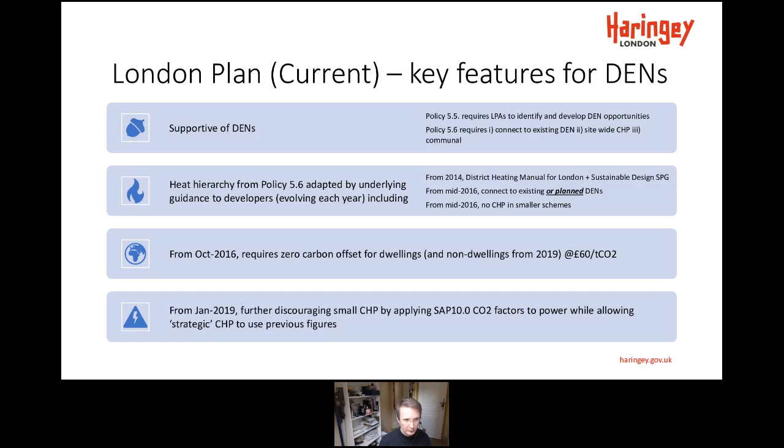So this is the evolving London Plan. Another key area where the London Plan evolved was in the publication of the Sustainable Design SPG in 2014. And I've highlighted a few key things which changed there, but it's mainly about timing, where it started to recognise some of the timing issues Simon was talking about, district heating coming along after a development.

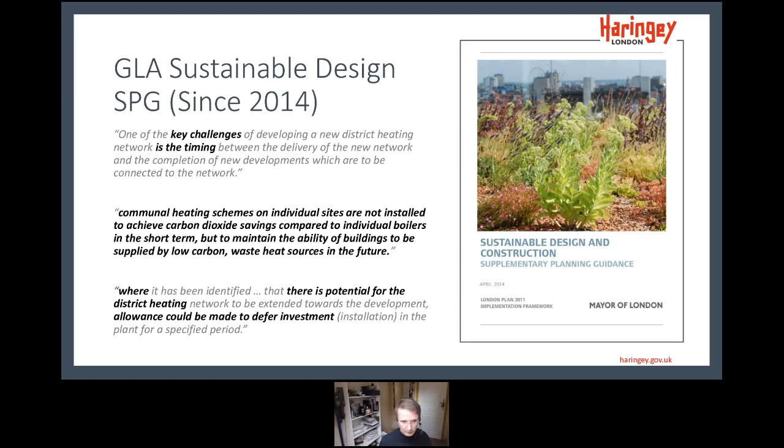And so it talked about, for the first time, using communal gas boilers on site instead of an on-site low carbon solution, and deferring some of the investment until later, which is one of the key things we do with our financial contributions. And then, I am not scrolling. There we go.

Then we've got the new London Plan, which is kind of version 4, and it's changing slightly. It's still very similar. One big step is the carbon offset prices changing from £60 a tonne to £95 a tonne. And it's also got this more detailed map of heat network zones, and Anne-Marie showed how that was getting improved by the GLA as we are speaking. So that map on the left is going to change slightly, but there are specific areas where heat network zones are in place.

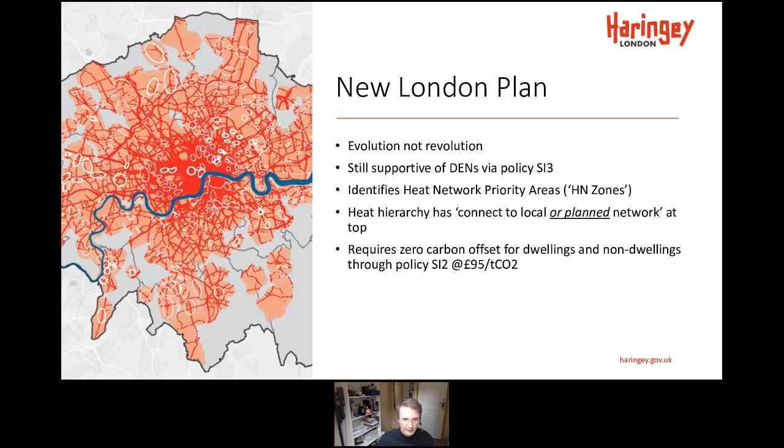Then a practical application in Haringey. So in Haringey, our evidence base is based on our decentralised energy master plan from 2016, and the map on the right shows a key figure. Basically, there's an energy from waste plant just over the border to the north in Enfield, and we can see a big strategic network growing, covering most of the borough of Haringey, joining up to Waltham Forest to the east and heading down to Hackney to the south.

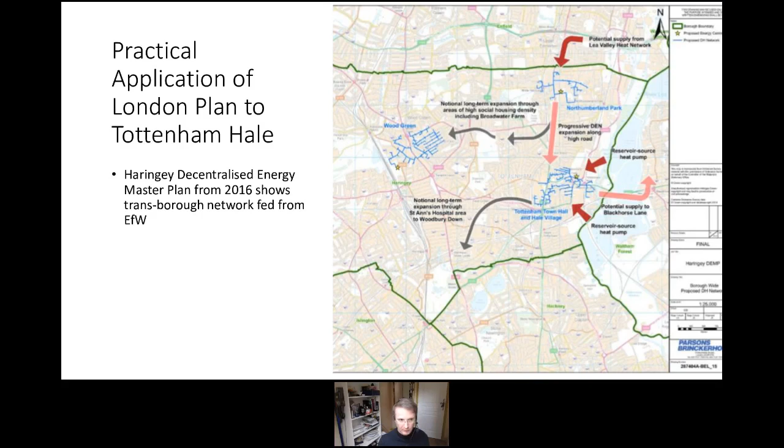And with that evidence base in place, showing that the most affordable way of decarbonising heat in the borough was through a strategic network, we've managed to move ahead on a number of other planning policies. So within our local plan, we've got a policy, Development Management Policy 22, which sets out more detailed maps. We've got these 3 key growth areas in the borough where probably 90% of the developments are occurring, and that's where we think our heat networks will be. And using HNDU funding, we've looked at CHP schemes in each of those areas.

It looked viable. So within our planning policy, we've got these purple areas where everyone developing in those areas must be heat network ready and prepared to connect. And then in the pale blue areas, it's only much bigger schemes, so schemes referable to the mayor, which tend to be very large. But there's some clear guidance to developers about where we expect them to be able to connect.

It's also worth saying this dates back a bit to 2016. So like some of the other people, our planning policy is evolving slowly. When this was put in place, the energy from waste plant was 10 years away. Now we're almost in 2021, it's 5 years away. Things have moved on a bit.

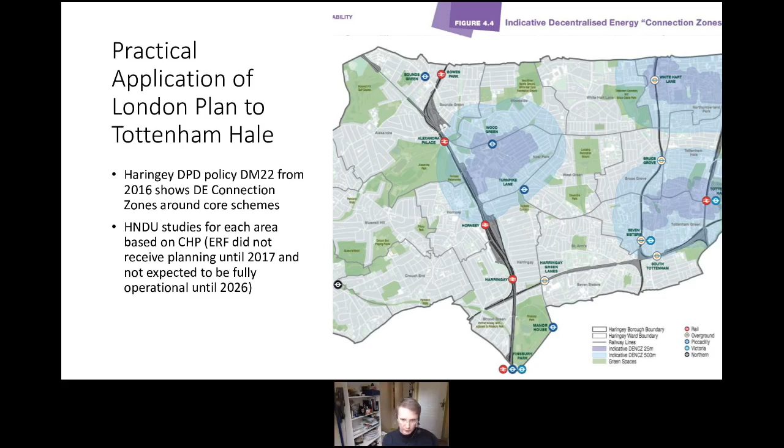And what we saw when these schemes were coming in for planning in 2016, 2017 was all the developers were suggesting small CHP on site. So there were 4 developers, 7 planning applications, 10 CHPs. And they all achieved the magic 35% reduction on site, which is the GLA minimum. They might get 35.2. They don't really push beyond it.

The CHP in these schemes was all oversized. It wasn't cost effective to operate. There was no electricity customer. It was not very well thought through, and we didn't think the CHP was likely to operate in the way they were telling us it would. It was also around this time that the London Plan changed to avoid CHP in developments of below 500 homes, and none of these developments has got 500 homes in, so we were able to push back a bit.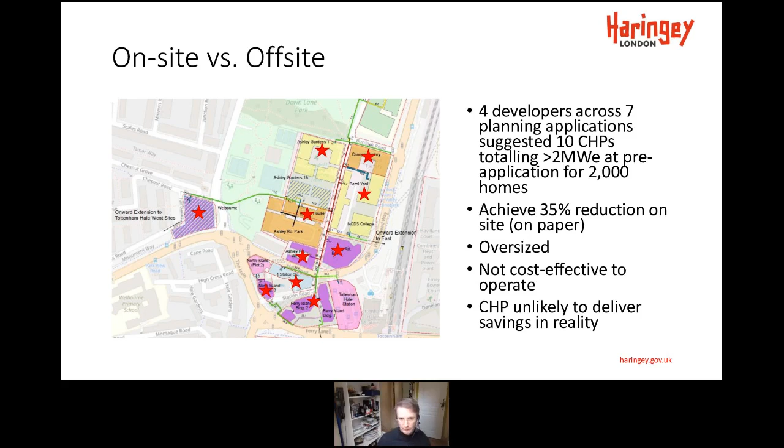And so only one of the sites got approved with CHP. Because then these sites were the next ones that came forward, and our approach was evolving. But we persuaded the developers there to omit the CHP, which meant the carbon performance got worse and the carbon offset went up, but it generally balanced out for the developer. There's a capital cost saving on the CHP, but a compliance cost increase from the carbon offset.

They're running on gas boilers only, in line with the GLA's SPD from 2014. We still achieve a small carbon reduction on site, and we require them to offset the other 90%. And in terms of being district heating ready, they've been required to put a pipe to the boundary and allow space for a future substation and a 50k connection charge to fund that substation, which doesn't fund all of the cost of the substation, which is interesting.

But the green sites are the more recent planning applications there. We moved on a bit. This is where we introduced the kind of delayed offset idea. So it's basically as above, but instead of simply increasing the carbon offset, we deferred the carbon offset and worked out if they connected to the DEN, so that's what we call our district heating, a decentralized energy network.

So if they connect to the DEN, they would pay a connection charge, so that carbon offset money would go directly to the DEN rather than going to the council and into its offset fund. And this is worth about £1,500 per dwelling. And we've got some conditionality in our Section 106s so that if they don't connect to the DEN, and we will allow a 10-year window, then they will just pay the carbon offset.

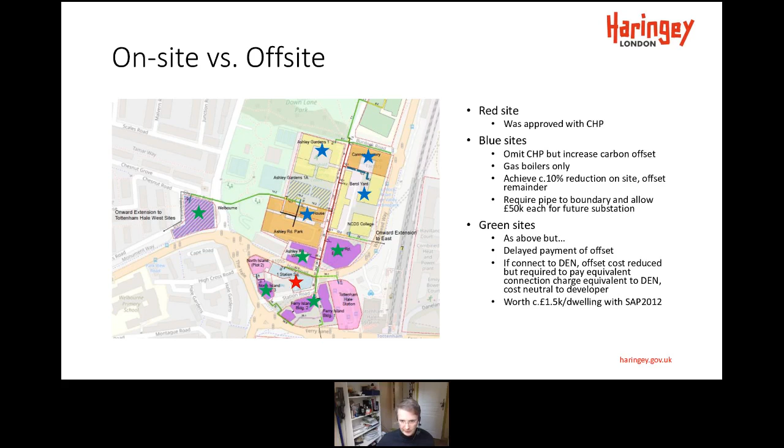And in terms of the impact, this scheme here is our first phase of the expansion from Enfield. So there's a pipe to the north, about a 2-kilometre pipe up to Enfield as well as this. There's about 3,000 homes here we're hoping to connect, and it's a £26.5 million scheme. We've got connection charges agreed in our Section 106 agreements for £4.5 million. That's because we changed our approach halfway through. If we'd used this deferred offset all the way through, we would have had £6.5 million. And if we hadn't used it at all, we would have had £2.5 million.

So there's still a funding gap here, and we've applied for HNIP. But our HNIP cost effectiveness would have been worse. So we would have had to ask for £9.5 million instead of £7.5 million, and that would not have helped the chances of success for our application.

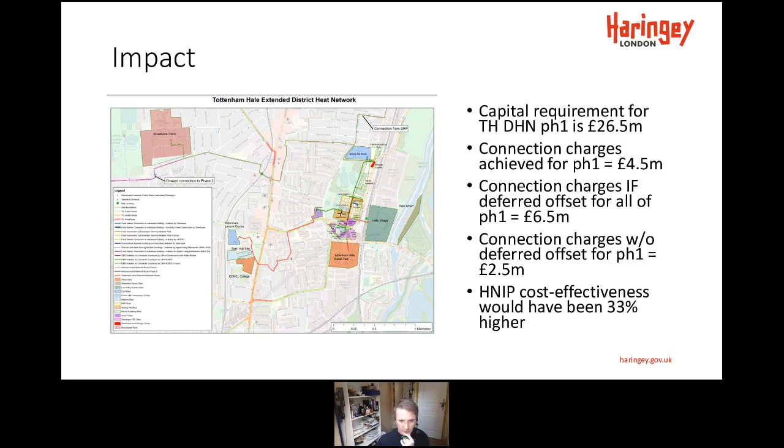And so, in conclusion, we've used existing planning policy to create these pseudo heat network zones, and we've used the Planning and Energy Act carbon offset to have standardised connection charges. And all it does is redirect developer contributions from the carbon offset fund to the heat network.

And the reason why we've done that is if it goes into the carbon offset fund, we've then got to fight with all of the other good projects around the borough for it to be allocated to the heat network. Don't want to have to do that. We'd like it to be going to the heat network. If the payment comes directly to the heat network instead of going to the council and then to the heat network, then it helps with state aid.

And there's something called Regulation 123 in the CIL regulations, which we were trying to address at the time. It was withdrawn earlier this year, but between 2015 and 2019, you were not allowed to use Section 106 for more than 5 developments to fund a particular piece of infrastructure. And we had more than 5 developments in Tottenham Hale, so we would not have been able to collect direct contributions to heat networks from them. So we found a way around that. That's now a bit moot, but it's still beneficial.

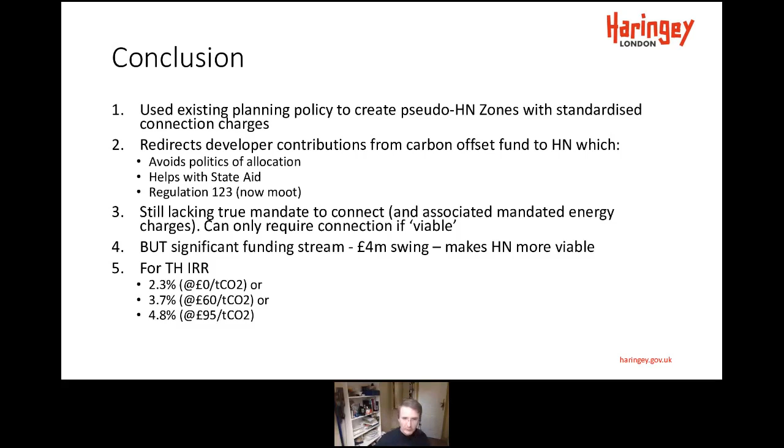Indeed, Tim, that was a very interesting presentation. I see there's already one question for you in the slides. We want to be having a think about that whilst Gideon's making his presentation. So if I can ask you to leave the stage and invite Gideon on, uploading Gideon's media. And all that works perfectly seamlessly. So Tim, if you want to head off, just with that cross at the top right hand corner of your video.

Perfect, excellent. Okay, Gideon, I will hand over to you to talk to us about how things are actually working in Barking. So over to you, Gideon. Thank you very much, Simon. Good afternoon, everyone. My name is Gideon. I am the Interim Ops Manager for B&D Energy at Barking and Dagenham.

Before we start, I'm conscious I'm speaking last, so if you don't listen to much else, the main takeaway of this whole presentation is that timing is extremely important, and that just means two things. It's engage with developers very early and engage with them often. So that's the main takeaway from this presentation.

So who is B&D Energy? We are an ESCO, we are not a utility company. Our focus is on delivering local energy schemes requiring new energy infrastructure to supply residents and business across the borough with energy at fair prices, but also delivering a fair level of return to the council. This was set up in June 2016, and we are seeking to combine public sector leadership with private sector commercial expertise and social values of the voluntary sector.

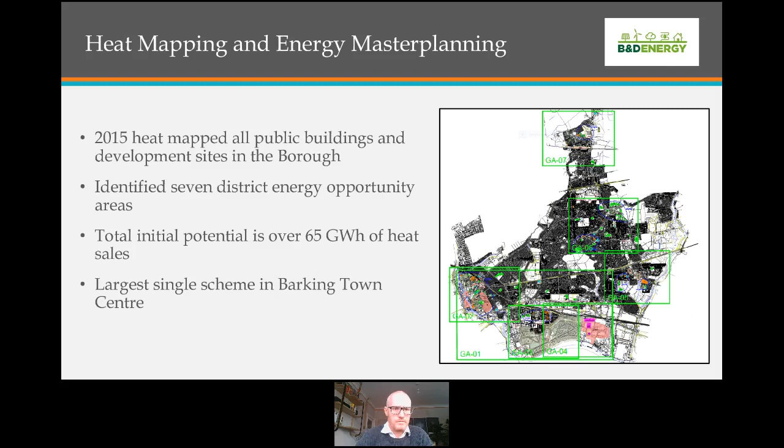And before that, we had a pilot scheme in Becontree that linked various development sites. This is the second largest opportunity area, and late in 2016, BEIS opened their heat network HNIP pilot for applications, and we applied and won £1.1 million in early 2017. The scheme delivers to core customers, 170 Countryside properties, and we also supply the Becontree Leisure Centre with heat.

However, initially, these were 3 Countryside development sites in separate locations, and Countryside initially approached the project using local in-dwelling solutions. Sorry, I'm just looking at two different sets of slides, which is why I'm struggling a bit. Yes, so the council used its relationship with Countryside and the GLA through the development and the planning process to drive a planning permission being submitted by Countryside on the basis of a heat network connecting all three sites.

Focus here was just to work really collaboratively with the council and their planning department, as well as the developer. The focus is really to help the developer make this planning application work. And it's important that they understood the benefits of doing so from the beginning. B&D Energy developed the energy centre and the area-wide network, and then Countryside paid a connection charge to B&D Energy to connect their three sites onto the single scheme.

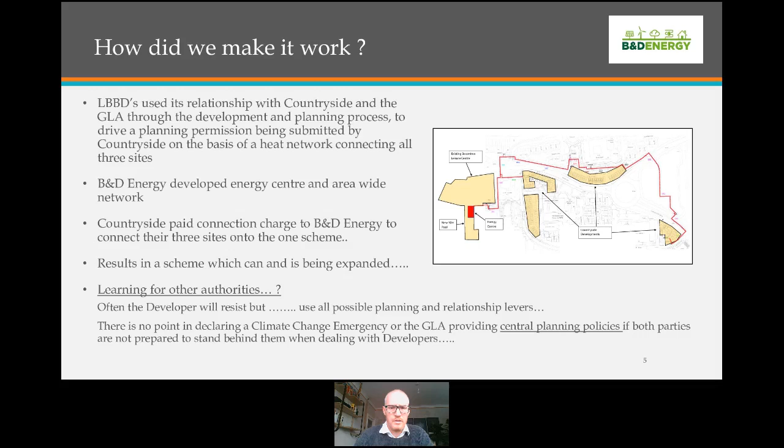Then moving on to Barking Town Centre. The core scheme is made up of 15 different sites across Barking Town Centre, but it's very condensed as we can connect all of those onto 2 kilometers of primary network. There's an existing energy centre at Gascoigne used to deliver initial supplies. And this is critical to meet those early phase heat loads, because obviously these 15 development sites come on over a long period of time, and some of those are coming on quite soon.

The technology that we are using is we've agreed with the GLA and they've granted us what is called a strategically significant network, and that allows us to come under the SAP 12 rules. And what that basically means is we have the lifespan of those CHPs, which is 15 years, to implement low carbon solutions as a replacement. And we are already trying to do that much earlier, of course, and looking at waste heat from several sources within the borough to do so.

The energy generation in that energy centre will be two 1.5 megawatt CHPs and 27 megawatt backup and top-up boilers. And this is supported by a grant from HNIP.

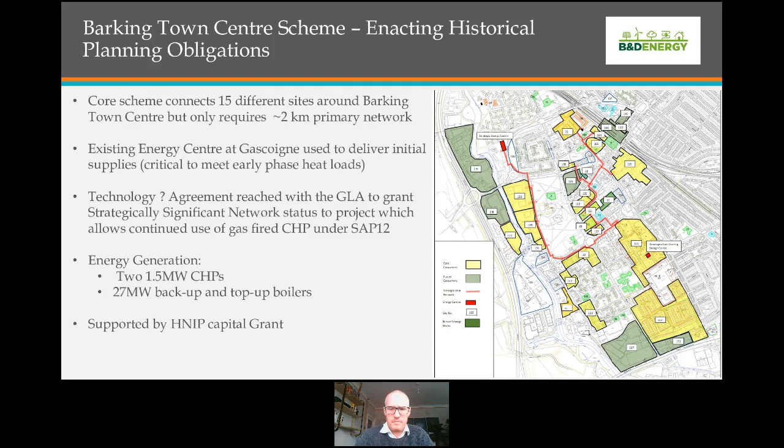Of those 15 sites, many are under council control, but many are also private developers. The later ones seeking planning permission recently or moving forward will be captured by planning policies that drive network connections. However, some are working from old planning permissions, and that is where it becomes a little bit difficult. One key site in particular, their energy strategy made it very clear that they had to connect under, like we've heard in many of the other presentations, a Section 106 agreement. But it is very, very important to remind developers of this often.

On here on the right, you see that box at the top. You might not be able to read it, but one thing that we have with our planning department now is on the planning website, it is very clear that we have networks in the borough that there's an obligation to connect to. But also more importantly, when you are a developer and you develop a scheme that is big enough to maybe serve as a catalyst for a new scheme, then it is important that they come to talk to us. So again, going back to the theme of speaking to developers as early as possible, we've got it out there on the planning website that developers need to speak to us when they are planning to do new developments in the borough.

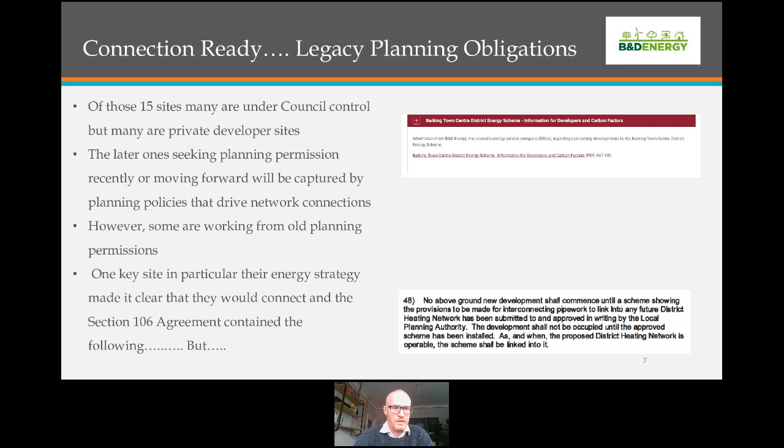Then, as far as enacting legacy obligations are concerned, the site that I was mentioning was already being constructed when we conceived our scheme, and all we had to rely on was those few short sentences under condition 48 of the Section 106 agreement. And we are still on a journey to connect with these, but we are getting there.

And some of the obstacles worth mentioning are that the site had now been sold by the developer to a new owner. Fortunately, they are facilitating some of those conversations that you need to have with the new owner. And there's a pipe connection that was being installed to the site boundary. But of course, we have some concerns about the quality it is installed to.

And again, this kind of goes back to early and often: we're working with our consulting engineers to go and inspect that work as early and as often as possible, just to mitigate any risks of quality.

The on-site energy center was progressed with a very small-scale CHP to meet planning obligations. And the problem that caused is that there's no space now in that substation for us to put the thermal substation skid in. Unfortunately, we will have to remove that to install it with the heat exchanger.

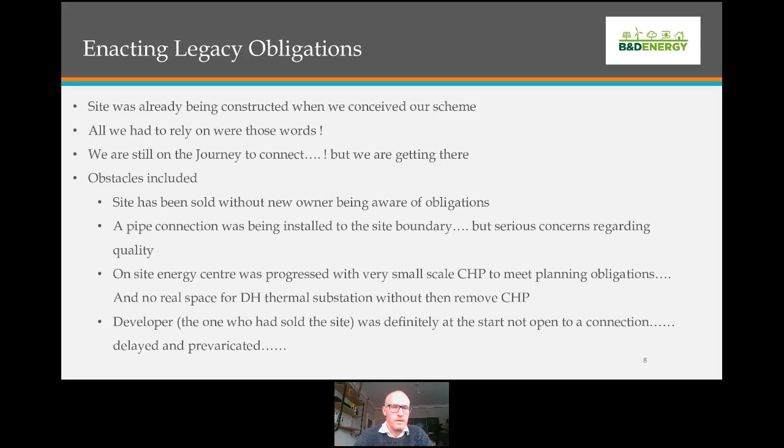And then lastly, a couple of lessons that we've learned. Ensure that you have plans of networks drawn up and communicated with the developers as early as possible. It just makes a document very, very clear, and it's difficult then for developers to walk away from that and claim that they were not aware of the obligation to connect.

Ensure Section 106 wording is sufficiently developed, and at all possible levels, you have to remind the developers of those obligations to connect. You will have to be very resilient to the inbuilt desire of developers not to connect, especially when they are mid-build and reaching the end of their build. But you must also still be prepared to think flexibly and keep them at the table.

We've seen through our communications and relationship with a specific developer, you need to remain open to respond to the objections and negative points that they might bring to the table. For example, we had to agree some advance funding to resolve a building timeline issue around a pipe that needed to go into the ground before landscaping started.

And there needs to be a little bit of flex to meet the developers halfway when these really practical issues come along. In the end, you are working with a commercial private developer. They might have reservations about working with a public body, and as the ESCO that sits in the middle, it is about crossing that bridge and putting their minds at ease.